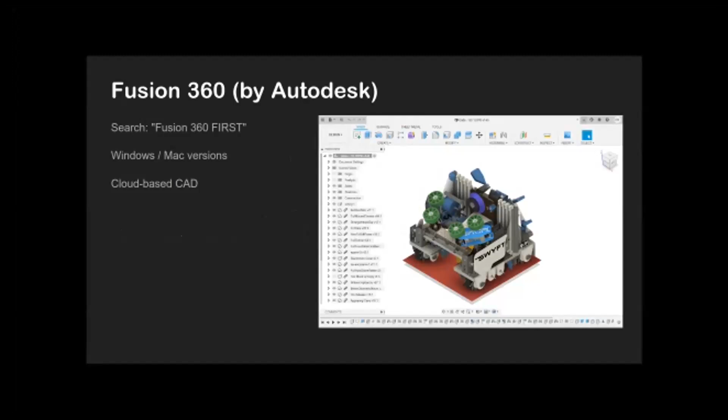So Fusion 360, if you want to know how to get it, here's how I always do it. I do a Google search for Fusion 360 FIRST, and let's see if I can pull up my Google page here and do that in Chrome. So if I just say Fusion 360 FIRST, then the page that I usually find, first of all, is Fusion 360 for FIRST robotics competitions, and then I'll follow that particular link.

And it'll go through, and it has enrollment, and there used to be a place here where you could register. If it's not there, it's probably the second link. Oh, FIRST Robotics, Autodesk, that's where I often would go. And it talks about the resources that are available for teams if you're doing FIRST Robotics. So there's free software, and there's the link here that says Get Fusion 360. So that's where I've always started, and I've been able to get Fusion 360 through there pretty quickly.

They talk a lot about educational licenses and about having to be affiliated with an official educational institution, but as long as you list yourself as being a mentor for a team, my experience has been that you're able to get access if you're an adult and you're a mentor. If you list yourself as being a team member, then they're pretty good about being able to get access as well.

The other thing that came up today in an email, I got an email from Rachel Moore. Rachel is another FIRST expert in North Texas. She has done a lot of FRC, but she's also been mentoring FTC. She's an FRC alumni. She's a Woody Flowers winner, if you know what the Woody Flowers Award is. And she said to remind teams or have people consider Onshape. And it's another CAD package, but it runs in a browser.

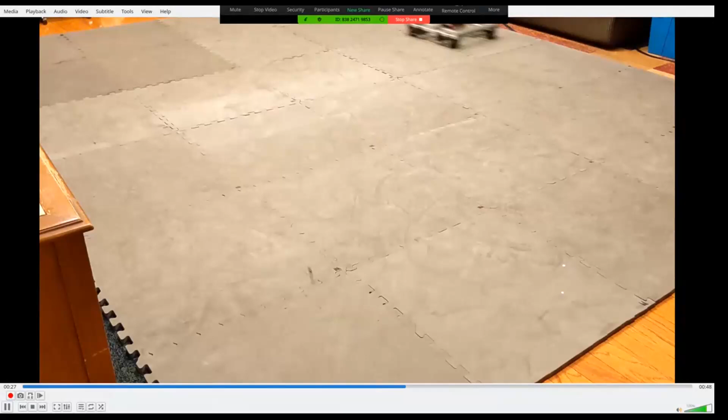It's a mecanum-based robot, which means that in addition to turning and going forwards, it can go sideways, and you can see it going sideways here. And you can see it's a little bit speedy. 7172 likes fast robots. So I showed this one to the team, and they're like, yeah, it's almost fast enough. It'll have to be faster.

My goal for creating this robot was to come up with something that is entirely REV-based. So I wanted to come up with something that was entirely REV Robotics based, or almost entirely REV Robotics based, that was a mecanum drive that had some important features that I like to see in robot designs.

At the FlySet workshop in a couple of weeks, I'm going to focus on the design aspects of that robot, the principles that I was using to create that robot. Tonight, I'm going to show just the mechanics of how you might use Fusion 360 to put it together. So that's what we're going to be working on tonight.

So with that, first of all, does anybody have any questions? Anybody have any comments before I go on? As I go through tonight, I'm going to stop frequently to invite comments and questions.

Patrick, it's about the educational license. It seems Fusion 360 now requires the students to submit some evidence document to show that you are part of the school. That's possible. What other organizations have accepted in the past is a student ID, and or a report card would do it, right?

So if you have a report card, you could blank out the grades and some of the personal information, but most organizations that I've worked with, such as the Texas Workforce Commission, have been just fine if you did a student ID or something like that. And certainly a letter from a teacher would almost certainly work.

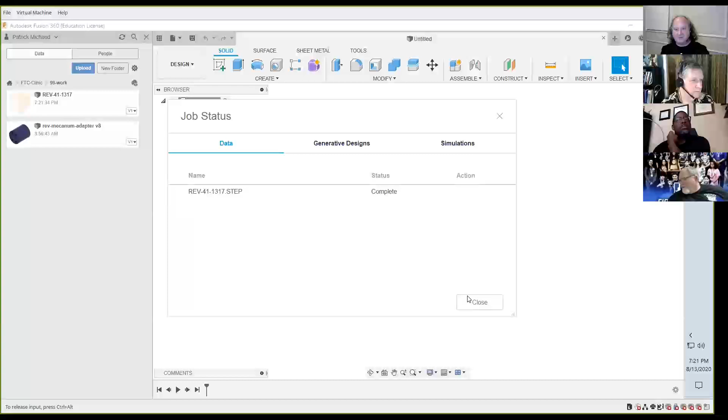You can see over here on the left is the file I just uploaded, Rev 41 1317. If I open that file, it opens up, and we can see here's the part. It's a bearing block, a bearing pillow block.

Usually what I do at this point is rename the part so I can find it more easily, because I don't have the Rev part numbers memorized. And if anybody does... anyway, I'm not going to say anything. So I'll call it bearing pillow block, but I leave the part number there so it's easy for me to find. So there I got a bearing pillow block.

To go along with the bearing pillow block, you also generally need a bearing. So I'll scroll down a little further, and there's the bearing I would need. I'll go to that page and download it. So I downloaded that step file, and now I'll go back to Fusion 360 and upload that bearing. That's the step file there, and go through the same process.

You can upload multiple files at the same time, you don't have to do it one at a time like I'm doing here. And while it's working, you don't have to wait for it to finish, you can go do other things while it's working. So while that's happening, I'm going to go get one or two more parts I need for this demo.

I also need a hex shaft, so I'll download it. And I also need a wheel, so let's go back to motion. Oops, rotary motion would have been fine. Rotary motion, and I'm going to grab a wheel. Let's get a 60mm Omni wheel and download it.

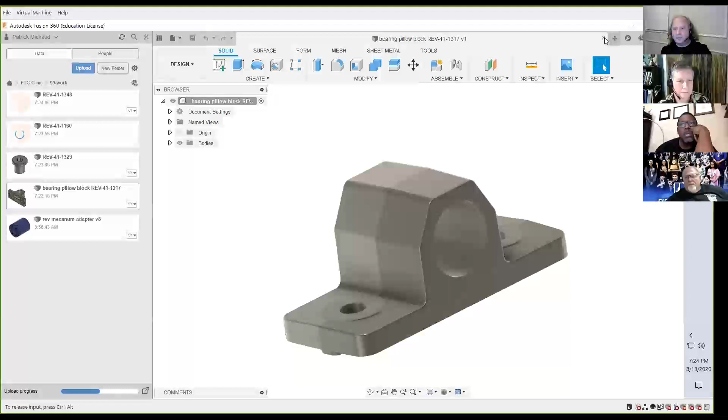So that's how you download and get parts in for your model. Now there's a way to organize them, and I'll show you the organization system my team has been using for a bit, but right now it's easier if I just show all the parts over here. I'm going to close this window with the bearing pillow block, and start like I'm creating a new robot.

So here I'm in Untitled, this is a new robot. If you want to build a new robot, you actually need to save what you're working on before you can load any parts in it. You have to give it a name, so I'm going to save, and this is going to be Example Robot 1. You can see it created Example Robot 1.

Now once that's been created, we can bring parts into this model and start putting them together. So I'm going to start by bringing in the bearing pillow block and putting it into this model, and there it is.

When you first drop it in, you can turn it, replace it, or move it to different places. So I'm going to turn it upright, at least the way I think of it as being upright. You can see these little handles here. If you grab an arrow, you can move things up and down. If you grab one of these little dots, you can turn it in different ways, turning it around on all the different axes. So you have a lot of different ways to put it together. And when you have it where you want, you just say okay.

That has brought this bearing pillow block into my model as the first piece I'm going to start with. So we've seen how to bring parts into Fusion 360, and we've seen how to put them into our project.

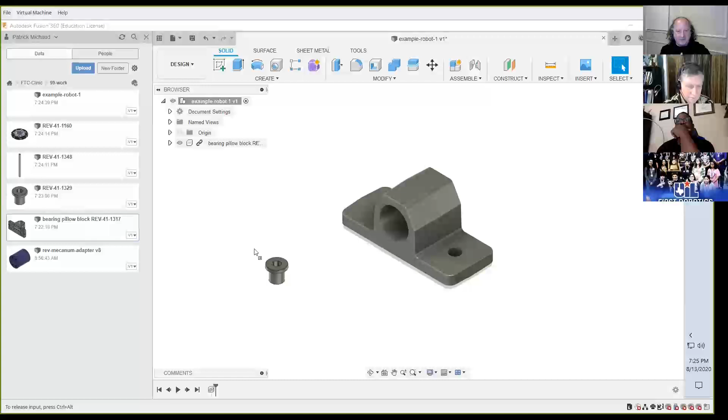Now I'm going to add a bearing to this. So I'm just going to grab the bearing and pull it into my model, and you'll see that it puts the bearing in. It likes to always put things in at the origin where things start, and they tend to overlap, so I'll usually just grab it and pull it off to the side.

The most important operation to know about and be familiar with when you're trying to assemble a robot in Fusion 360 is the joint operation. That's how you join two things together.

I'm going to go to the joint menu, which is under assemble. There are keyboard shortcuts for so many things, but I'm going to try not to use the keyboard today so you can follow what I'm doing and not just wonder how that happened. So I'm going to start by creating a joint.

A joint is a connection between two parts of your model, between two components. If I click this and say joint, it opens a little dialog window on the right, asking what two things I want to join. What is going to be component one and what is going to be component two? You always take the thing you just added, or the thing you want to join first, and then pick what you want to join it to.

So I want to join this bearing and leave this pillow block where it was. I'm going to scroll around here. There are a lot of different controls for moving your model around, and I'm not going to go through all of them since there are tutorials for that. But I'll just scroll around to the bottom here and say I want to join.

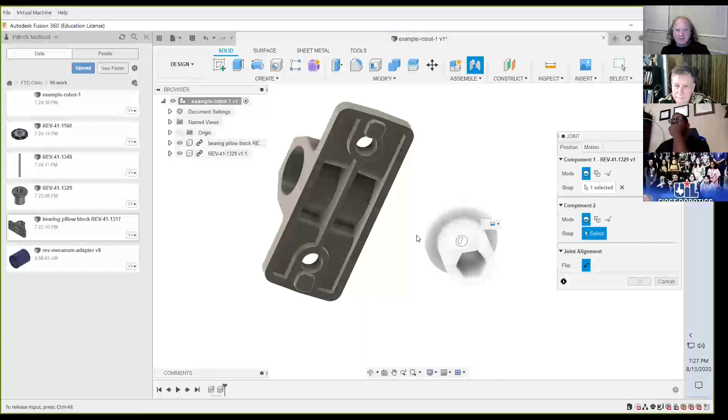Once I've clicked on it, it grays out because you can't join it to itself. Now it's wondering what you want to join it to. I want that ring I just selected to match up with this hole in the pillow block. So I'm going to select that, and once I click those together, it puts them together.

Now, unfortunately, it put them together backwards. So there's an option here in the dialog box called flip. It thought it needed to be flipped, but I can just flip that and make it go the other way. Now the bearing is joined with the pillow block as a single unit.

So if I just hit OK, now I can move it around, and if I grab the bearing, you'll see that it moves together because they're joined together. That's the very common operation we'll be working with throughout this.

You can also see, just very faintly, there's a little marker right in the middle. That's the marker that represents a rigid joint, and it's saying this is where these two things are joined together. So I can go and edit that, and there are lots of ways to edit the joints.

I can look at that. If we look at the timeline, we can see that we've done 3 steps so far. One step is that we inserted a component, a bearing pillow block, and then we inserted this part, REV-41-1329, and then we joined them together in a rigid joint.

I can go back and edit that joint, and I can say I want to change the motion, I want to change the type of joint that's there. There's lots of choices: it can be rigid, it can be a revolute, it can be a slider, it can be cylindrical, it can be a pin slot mechanism, it can be a planar joint, or it can be completely free in a ball joint.

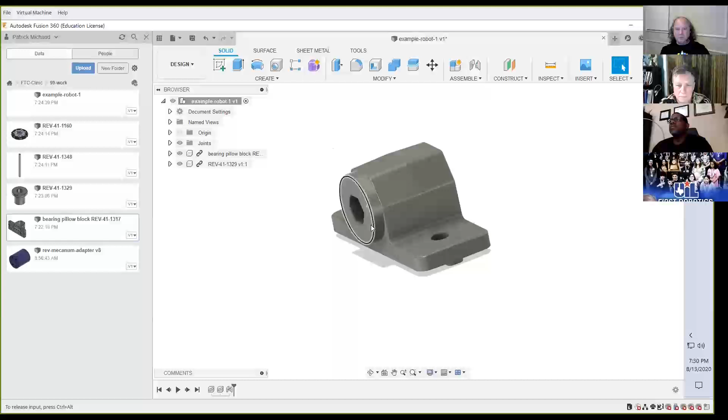So now we can model that. We can move it by hand. So if I try and grab it, what happens is the pillow block tends to want to come with it. I'm going to ground the pillow block. I'll talk about that a little bit more later.

But I'm going to ground the pillow block, which means I don't want the pillow block to move anymore. The pillow block, if I grab it, I can't move it anymore. It's fixed, it's grounded in the system. But with the bearing, because it has a revolute joint, I can still make it turn by hand, just with my mouse, to be able to see what the impact is.

Whenever you move something around, there's a little thing that notes that the position has changed, and you have an option whenever you change the position. So I could just be playing around with this. One option is I want to capture that and take that new position, or I want to revert back to where it was before I started fiddling with it. So I'm going to revert, and you'll see the bearing will pop back to its original orientation.

So I'm going to stop there and open up to see if anybody has any questions.

Am I going too fast? Good enough? Too slow? You can put it in the chat if you have a question, and I'll try and see about that.

Okay, Scott says going great so far. I'm going to continue on.

All right, so now the next thing I'm going to do is put a shaft into this pillow block. So I can go over, I downloaded the shaft already, I'll pull it across. You can see there's the shaft, and I'm going to kind of move it out of the way.

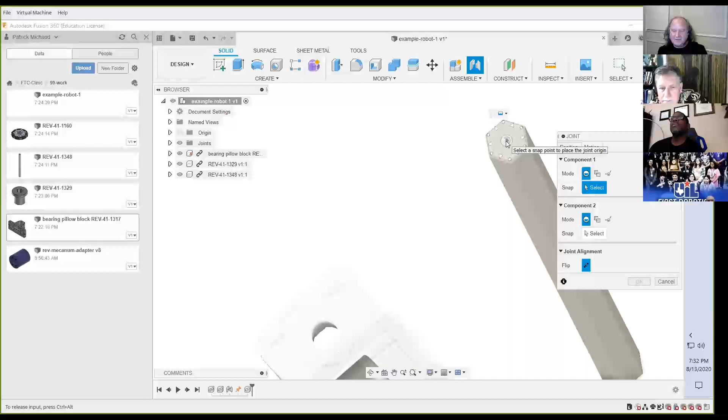So I'm going to grab the end of this shaft. As I scroll in, as I get on that face, you see all those little dots there—those are all the snap points, the places that can be joined to. I could join that little tiny corner there, or the center of that face, or the center of that edge. I can join that edge, I can join this face. You can pick where you want to join.

I'm going to join right on the end of that face, and I want to attach it to this pillow block, that center point on that face.

Now this one becomes tricky. So the lesson to learn here is the control key is your friend. I meant to get a keyboard display so you could see what keys I was pressing when I use special control keys, but I didn't have time to get that. So I'm highlighting this face right now, and I really want to join the center of that shaft to that center point.

But as soon as I move off the face, it says, oh, you're wanting to go somewhere else. And I don't want to join to the center of that face. I want to join to the center of this round face on the end. So once it's highlighted, if I hold down the control key, so right now I'm holding down the control key on my keyboard, no matter where I go with the mouse, it keeps that face highlighted. And now I can get and select the point that I want to join to.

So now I can say join with that. And so it joins the shaft there, and it's a rigid joint. And we can see that it's made that connection there between the shaft and the bearing block. Now, I really want the shaft to go through the bearing block, so I'm going to flip it around. And we can see that when it joined, they're out of phase with each other. They're not exactly fitting together snugly because they're about 30 degrees rotated. With round shafts, you don't have to worry about that, but with hex shafts, you kind of do.

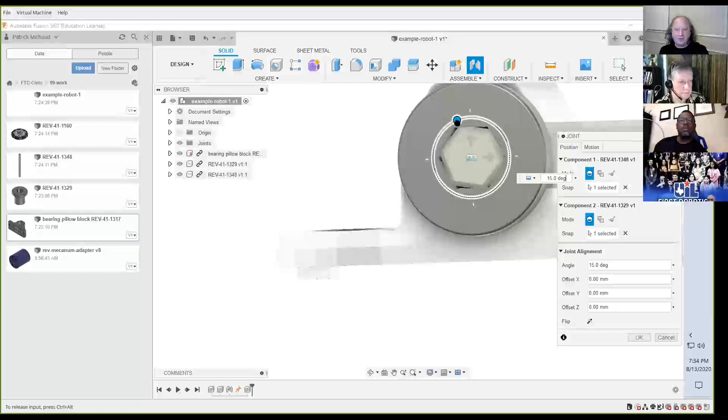So once again, like we did when we first placed a component, you can turn it. And I'm just going to turn it 30 degrees so that it will fit correctly within that bearing. The other thing is that I probably want it to extend away from the bearing, so I'm just going to pull it through. If we scroll out, you can see what I'm doing is I'm moving the shaft through the bearing just as if I was assembling it by hand. And I'm just going to put it in the middle there. And then I'll hit OK.

And now the shaft and the bearing are joined together. And in fact, if we watch really carefully, when I move the bearing, you'll see that the shaft will turn with it. If I can select it, there we go. When I move the bearing, the shaft is now turning with it because they're fixed together. So they're both turning around that revolute joint that the bearing had.

All right, let's add one more component just to show more of how this works. Let's add a wheel onto the shaft. And let's move that out of the way. So I'll say, okay. This wheel's a little tricky. So Rev has been really nice that the Omni wheel that we have here comes in and they actually have modeled all the different parts. But the step files don't always know the joints that are there.

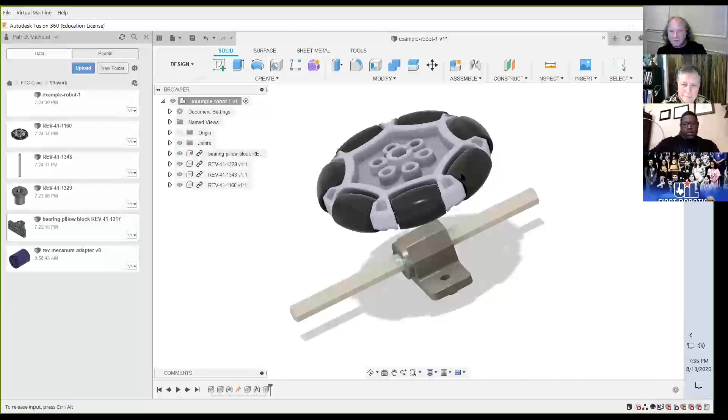So if I try and grab this, what I think will happen is you'll see, oh no, it's all together. Okay, good. I don't have to worry about it on this one. Sometimes when you bring in a model, if you grab one of these wheels, it comes away from the rest of the model because they're not joined together, but it seems to know about these joints, so that's good. So I'm gonna put this wheel onto the shaft. It's the same thing as before. So I'm gonna do a joint. It says some things have been moved, so I'm gonna say just continue, let it be back where it started.

Once again, I'm gonna select this face to get to that little center point, and I'm holding down the control key. And then I'm going to connect it to the bearing just like I had before. And rather than try and catch that center point that's there, I'm going to connect it to the outer ring. And so I'll select that. And oops, oh, it wants to know where to connect it to. I want to connect it to that little spot there.

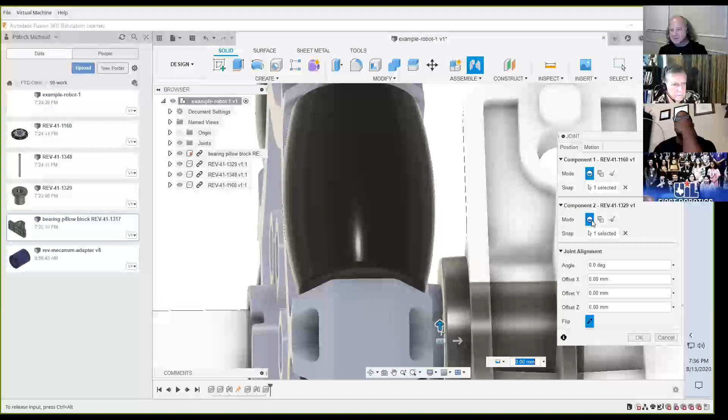And if we scroll around here, we can see that the hub of the wheel is directly against the face of the bearing because I picked that outer circle to do it. Let's try a couple of different spots just to see different things that would happen. So I'm gonna cancel where I wanted to connect it to. And now it's asking me, so I'm gonna choose this circle instead.

So if I connect it to that circle and we go around and see, you'll see that it connected the wheel to the back of the flange of the bearing. And so the hub is now actually inside the bearing. That's physically not possible, but the model doesn't care.

All I'm showing is that it depends on which circle you click as to what face it will actually connect to. I'm gonna go back and fix this. Again, so I'm selecting the outer face and then I go to that outer ring and I'm saying, make those two connect together and line up on that center point. And it does it for me. So now they're connected and we're good to go.

And since all of those components are rigid with each other, when I move the wheel, you can see that it turns with the shaft and the bearing inside of that pillow block. Any questions on there?

I see a question about somebody that's trying to drag the parts into the plan. So if you start a new project or a new component and you don't have it saved and you try and drag something in there, it won't let you do it, right? It'll give you this error: Please save this design before inserting components. So that may be the problem that's being seen there.

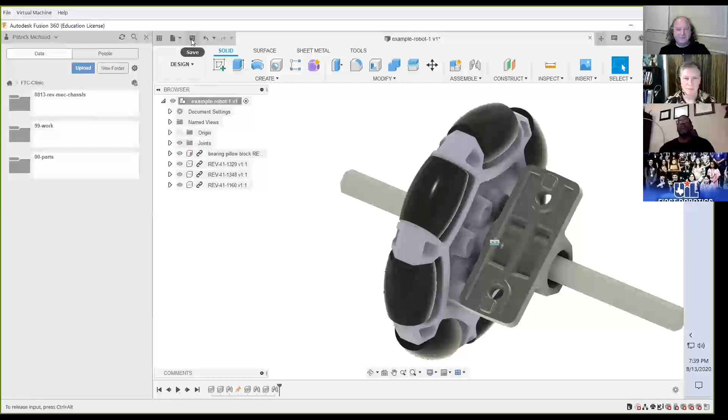All right. So let's go back up to the top level and I'm going to create a new folder and I'm going to call this 0813 Rev Mec Chassis. I'm going to space it out because that looked really weird. Mec Chassis. And now we're going to see about actually creating a drivetrain, something a little bit more substantial than this. Oh, by the way, don't forget to save. Save often in Fusion 360 because it does keep a history. So if you make some changes and you decide you don't like them, it's easy to revert back to an earlier version. So I just created a folder.

I'm gonna go into that folder and I'm going to start a whole new design. I think I'll leave that open just in case we need it. I'm going to start a whole new design, and this is going to be called our drivetrain. Right, so I've just started an empty project here, and this is where most robots would begin.

Actually, I'll go back to the example. You can see on the bottom, the timeline. These are all the steps that we did. So we inserted a component. We inserted another component. We joined them together with a revolute joint. Then we grounded the pillow block so that it couldn't move. Then we added another component, the axle, the shaft, and we joined it. And then we added the wheel and we joined it. That's the timeline of steps that are done.

You can walk through the timeline, so I can back up in the timeline to see the impact that each step had on the model. And you can also get rid of individual steps out of the timeline or insert things in the middle of the timeline if you need to.

On the left up here is the browser. And the browser shows you all the components and things that are part of your model. So here are the components that we added: the bearing pillow block, the bearing, the shaft, and the omni wheel are all there. And also here are the joints that we created. We created a revolute joint, a rigid joint, another rigid joint. And so if you just click on the little arrows, it'll expand out to show you everything that's in each of these different components so that you can do things.

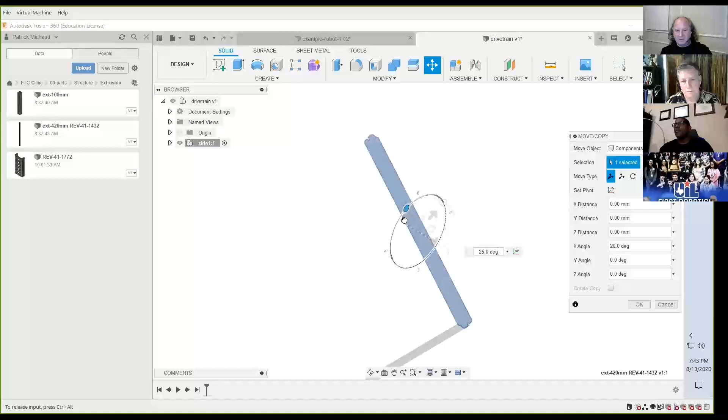So if I go in the parts window, we've decided to pretty much copy the Rev hierarchy for how things go. Most of the other robotics companies tend to use a very similar hierarchy. So we have a folder where we keep all the bearings and shafts, and we have another folder for electrical parts, another one for hubs and sprockets. So extrusion will be structure. So I'm going to go in and grab a piece of extrusion, and I want this 420 millimeter extrusion. So I'm just going to pull it into my model. And when I do that, I'm going to rotate it so it's running that way.

And so this is going to be the left side of my robot. You can see that I have it going this way. The orientation that we have is up in this upper right-hand corner. You can see that the top is pointing upward right now. Front is facing towards the bottom left of the screen, and the right side of the model, which is the left side of the robot, is facing towards the bottom right of the screen. So I've just pulled it in there, flipped this around that way, and I'll say okay.

And now I have this nice long piece of extrusion that is going to be on that side of the robot. And I'm going to go ahead and ground it as well. So I'm going to expand this out. We can see here's the extrusion that we just put in. I'm going to right click on it and I'm going to say ground and fix that in place because every other part of my robot's going to be relative to this one.

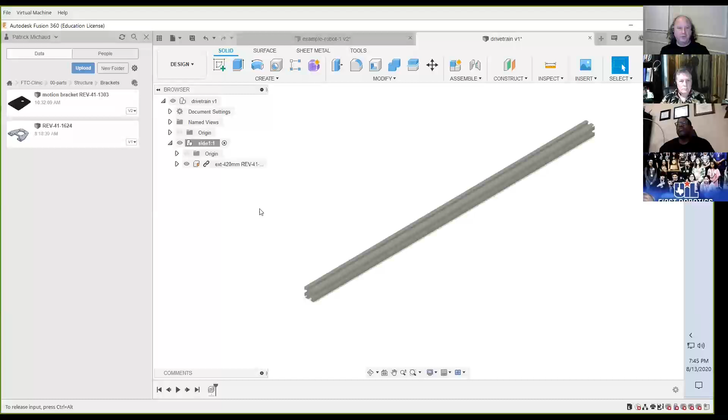When designing this robot, I wanted to try and stick with parts that were in the starter kit so that more people would be able to build the robot and not have to buy a bunch of special parts. So the indexable motion bracket is one of those parts. And the most important feature for my purposes is that it gets the shaft as far away from the extrusion as you can get, because I need room for the wheels. So it allows you to get the center of the shaft about 32 millimeters from the center of the extrusion, which makes it big enough to get a mecanum wheel below the top of the shaft.

Guido has a question if you can shorten the extrusion. Yes, you can. And I have a special way of doing that. I don't know if I'll get to it today, but I will show an example of that either today or in the next episode. But yes, you can shorten the extrusion. Let me do the quick example. Let's just go back into the example robot and I'll pull it in there. I create a special extrusion that defaults to 100 millimeters. So I'll pull it in and pull it here to the side.

And I'll show how this was created probably before the end of tonight, I think. So that's a 100 millimeter extrusion. You can see it was pulled in there. Right now it's linked back to the original file. There's a way that you can break the link. And when I break the link, what happens is this model that we're working on right now gets its own copy of that component, as opposed to being simply a reference to this other one. And by having my own copy of that component, now I can modify it pretty easily.

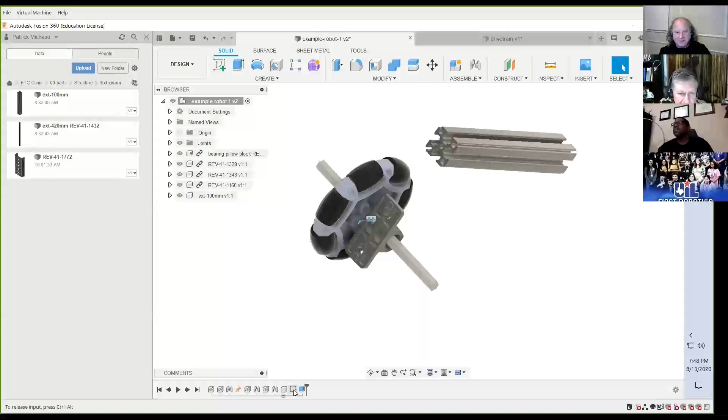And if I press this little plus sign, these are the 3 steps that were used to make this part. So one step was create a new component. The next step was a sketch, which is the shape of the end of the extrusion. And the third one is an extrude step that says how far to pull it. And so I can edit that and I can change the extrusion length from 100 to be some other length. Like let's say we need 225. So I just switched it to be 225 millimeters and that made it longer. Or I can even drag it out to make it as long or as short as I want.

So that's the way that on 7172 we've been making our extrusions. We just have a standard one that we can pull into the model, we break the link, and then we can extend or shorten it to be whatever length we want when we're putting it into the model. So that's the short version of it. But I'm going to stick with the 420 because that's what comes in the starter kit. I do need to go load in the indexable motion bracket. Let me just rename this. Indexable motion bracket. So it's easy to do. I'm going to pull it into my model so I get a copy of the model.

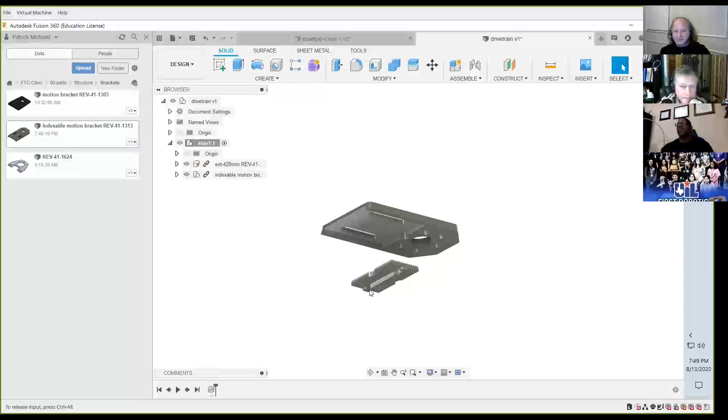Now, the way that the indexable motion bracket works is it's actually 2 pieces, right? So this one piece here is on the back, and I'll pull it away for a second. And it's the part that really attaches to the extrusion to be held in place. And you can see it's got this little bump ridge in it in the middle, and that's to go inside of the slot of the extrusion. And on the other side of that little tiny bracket, it's got this little grid here, this rack that's there, and you put it somewhere on the other bracket, and those pieces lock in place with each other to keep it from moving up and down.

The indexable motion bracket, it's not necessarily a super reliable part if you're not careful about it. So I don't know that very many people end up using it, but the starter kits always have them. And so it was an easy place to start to be able to do things. And the key thing that I needed is that it allows me to get the center of the shaft as far away from the extrusion as I possibly can. It's the bracket that REV has in their starter kit that gets you the farthest away so you can maybe fit a wheel underneath. So the first thing I want to do is I'm going to join this piece to this one to make them a unit at its maximum extension, so I don't have to keep doing that.

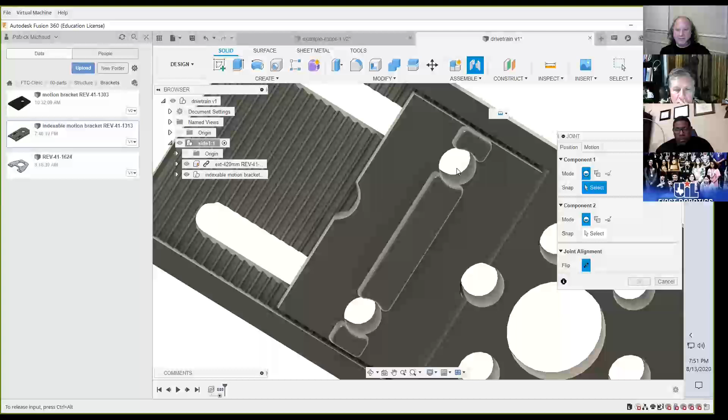So in order to join them, I need to break this link. I need to break that link so that I have my own copy of it in this model. And I'm going to do the join, and I'm going to say joint, and I want to join this circle right there, and I'm holding down the control key again to be able to get to that part. So I'm going to join that circle with this circle here, right?

And it's going to look a little weird at first. You're going to say, oh, you put it on the wrong side. Yes, I did put it on the wrong side. I did it on purpose, right? But you can see it took that circle that I had highlighted and joined it to that other circle.

Now, that way I know it's at its maximum extension to the top, right? And so now I can say, I want to move it this way, and I'm going to move it so that it's exactly snapped into place on the model. I could try and figure out exactly where that is. I could guess that it's probably 3. There's a really quick way to do it.

So I'm going to move it way over here. I have this arrow highlighted. So if I pick a face that is normal to that arrow, then it will line it up with that face. So I'm going to snap on this face of this other bracket, and you'll see it snaps it exactly in place so that they are aligned up perfectly. And so now when I hit OK, those two components are joined together and they'll move as a unit. And that's pretty nice because I'll be able to reuse this later on.

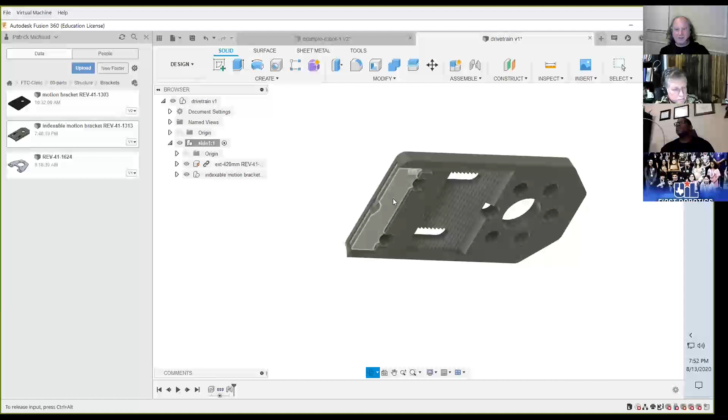Any questions about that so far? This is a good place to break for questions before I do the next step, plus I can get a drink of water. Or any comments? Is anybody having fun?

How did I snap it? Okay, so let me undo. I'll undo the joint. So in order to snap this together, what I did is I went and said joint, and I went on the little tiny bracket that's in there. I highlighted this face. I could also highlight this little edge here. I'm trying to get the center of that hole, right? It looks like I could almost do the center of that hole that way too.

But when I highlight something that puts a snap point on the thing I really want, then I hold down the control key, and now I can move my mouse around. Oops, cancel that. Now I can move my mouse around to get that exact point. When I've got the mouse highlighting that exact point, I click on it, and that says that's my join point. That's my first join point, which is the center of that circle. And now my second one is going to be up on the bracket, and there's a little plus sign right in there, and I want to choose it and make those two snap together.

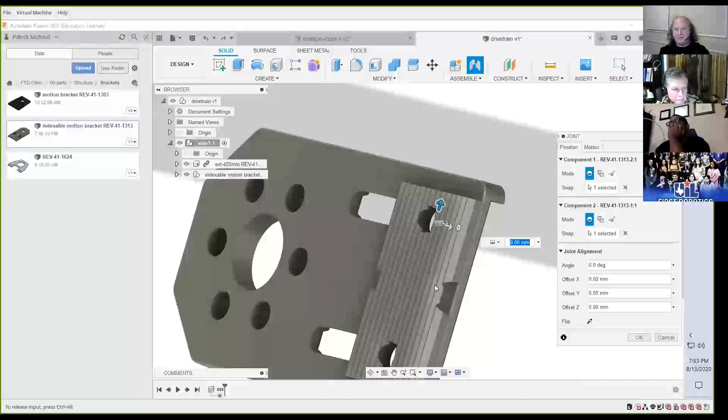And now, because it's on the wrong side, I want to use this arrow to move it back and forth. And when that arrow is highlighted, meaning that's what I'm currently doing, I can click on this face and say, line it up with that. And so it lines up with that, and now we're good to go. All right. So that's now together as a unit. I'm going to revert back to where it was. Now we need to attach this to the extrusion.

If you are doing Actobotics, it's really easy to attach holes to holes. If you were doing Tetrix, it's really easy to attach holes to holes. If you're doing GoBilda, it's really easy to attach holes to holes. If you're doing REV, it's really hard to attach a hole to a slot. There's not really anything to grab onto. So after a day or two of experimentation, this is the way I came up with. There are many ways to do it.

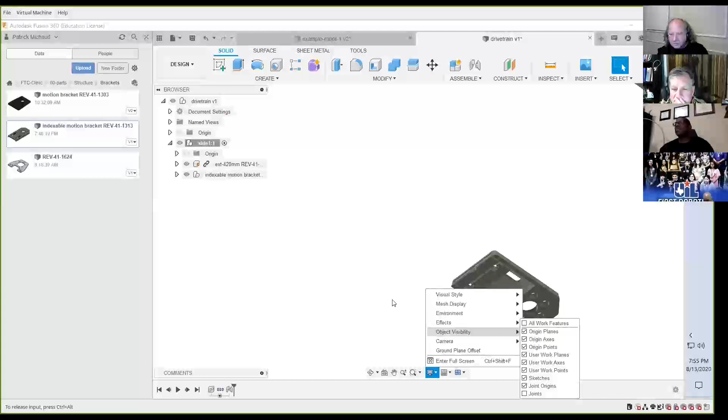And I'm going to go turn off my joints here real quick. So I'm going to go to object visibility. See that little joint symbol there? As you get more joints, they start cluttering things up and getting in the way. So I'm just going to say, don't show me the joints for now. I know they're there. All right, so the way that I found to do it is, let's get this closer together so that we can see what's going to happen here.

What I'm really wanting to do is to be able to attach this bracket into this slot that's right here. But there's not really anything that I can attach to easily without doing some weird calculations and the like. And I don't want to attach the middle of this face to the back of the slot, because that's actually too deep inside of the extrusion. In reality, what I know will happen when these are attached in the real world is that this face will be flush with this side of the extrusion.

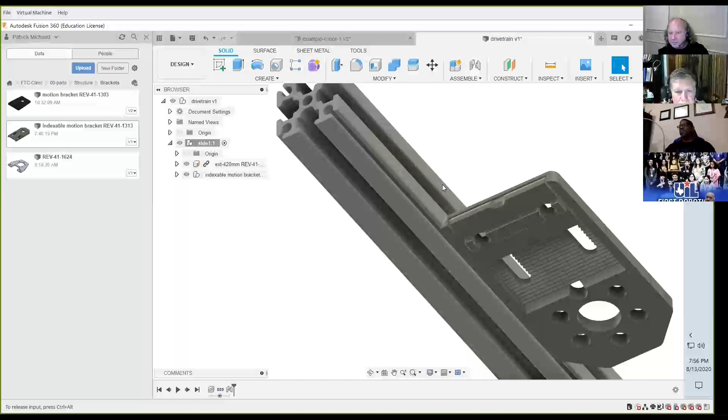So that's really what I'm wanting to attach somehow. But I don't have the proper things to be able to do it quickly. If anybody finds a faster or better way to do this, let me know someday. But what I'm going to do is another join, much like we did before. And I'm going to say continue. It's going to move that piece way far away because I didn't want to capture the position. And I'm going to grab this hole, just like I did before. I want to attach that hole right there.

I'm going to go up to the bracket, to the extrusion, and attach it to the back of this face. This is the inside face of the extrusion. There's a snap point way down in the center of the extrusion, but I'm going to grab the middle of that face, and say attach that point of the bracket there. You can see those two are now attached.

It's not exactly in the right orientation, so let's turn it around a bit here. I'm just going to turn it 90 degrees. So now it's in the correct orientation, but it's attached way at the back of the extrusion.

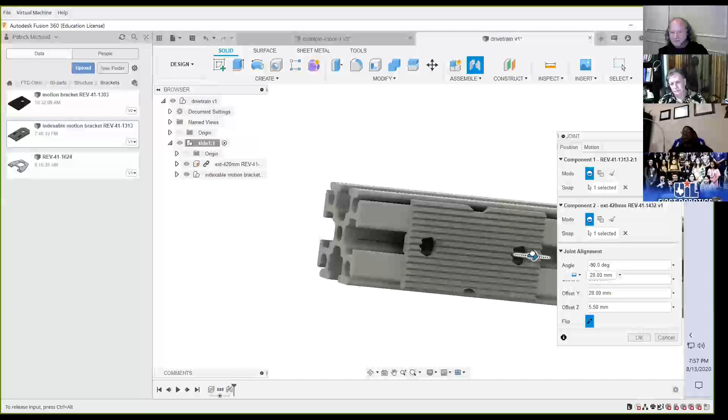I want it to be flush with this outer edge. So I'm going to grab that arrow and say, make it flush with this outer edge, and boom, now it's flush with the outer edge. And I can pull it to the right to make it part of the extrusion. Now that bracket has been attached to this extrusion exactly in the right spot.

You can see if we look really closely inside there that the little tabs on the bracket are nested inside of the slot, which is what you would expect to happen. It's flush against the face of the extrusion and so forth.

Any questions or comments on that?

So Patrick, how do you know it's in there? Is there a way in which you know the distance, the placement that you are on the extrusion? Like how many inches or millimeters?

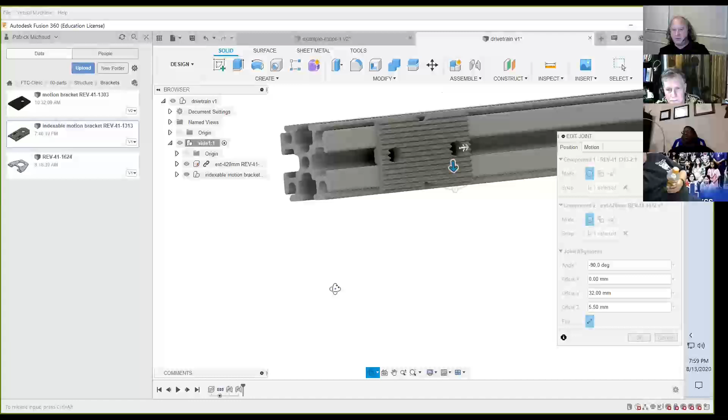Yeah, I did that a little fast, so I'm going to go back and edit that joint. Okay, so here are our arrows, and over here on the right is the distances, offset in X, Y, and Z.

My Z is this one, and it says I'm 5.5 millimeters offset in the Z direction from that point that I had started with when I did the join. I'm not offset anything in the X direction, which is down this way. And in this particular piece's Y direction, if I click that, it says I'm 32 millimeters away from the end of the extrusion.

So if I wanted to be exactly 50 millimeters away, then I can type in 50. Or if I want to go 40, I'm going to go 40. Is that going to be enough? If not, we can move it later. But does that answer your question?

That does, and it's measuring from the center hole, is that correct? It's measuring from the join point, right? My join point, it's the distance from - I'm going to hide the extrusion real quick. So I said to join this hole, the center of that hole, with that point on the extrusion, the middle of that. And so all the distances are from there, between those two points in the X, Y, and Z directions.

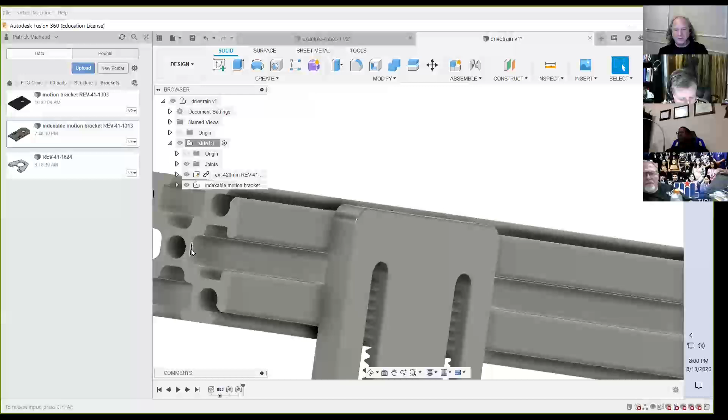Perfect. And just because I like to - a lot of times when the parts come in, they all get treated and colored as if they're aluminum. I'm going to change the appearance of this bracket.

So I'm going to go to appearance. Sorry, that was a little fast, let me close. So under the modify menu, this is where you can modify components in different ways. I'm going to go to appearance, and there's a bunch of built-in appearances in Fusion 360. I'm just going to grab paint because it's quick. I'm going to go to glossy, and say just paint this object black.

So I'm going to grab that little paint ball and drag it onto the motion bracket, and it will turn it black. Now it's going to be easier to distinguish the two parts together.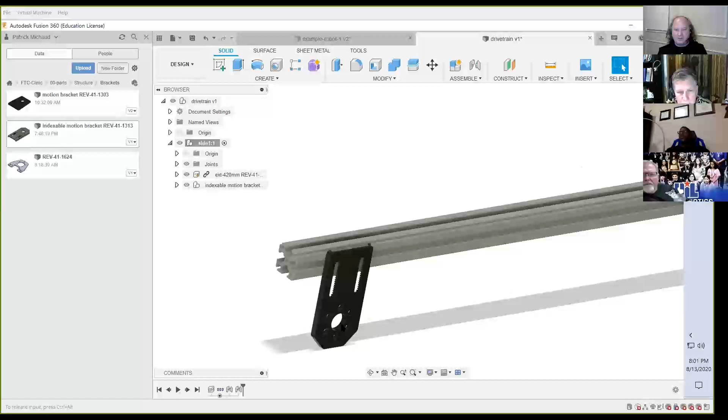Okay, so I've added an indexable motion bracket. For my model, I'm going to need another rail on the other side to hold the other end of the axle. So let's go ahead and put another extrusion over on the other side.

But Patrick, before you go on — yes? Sorry, no problem. You realize that you connected these, but the bracket is pointing down and you wanted it to point up? Is there a way to change the orientation after you've made this joint?

So you can always go back and edit the joint. And you see the little turn thing? I can turn it the other way, like so, and I'll probably need to move it back or something like that, and say okay, and there you go.

Nice, okay thanks. And I just hit undo, for everybody wondering how do you flip it back — I just hit undo. Okay, so next I'm going to want to put another extrusion over on the side.

There are a bunch of different brackets that Rev has available, but I have quickly become a fan of their C channel. So let me go to structure. Let's see if I have their C channel in. I do not have the one I need, so I'm going to go grab it.

I only left the first few parts unloaded just so people could see that work. Later on, the parts we need are all pretty much loaded, so we won't be spending too much time downloading parts.

So these are the C channels. These are new for Rev, they just came out for the upcoming season. They're kind of like extrusion matched with plates, but they're thin and strong because they are C channels with right angles. They're actually reasonably strong for putting pieces together.

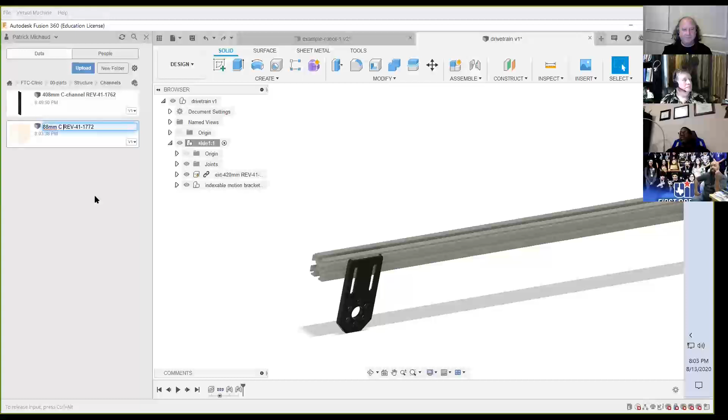The C channel is a really nice, small, lightweight piece that can go onto the robot and help make sure that you keep things square.

Now for 7172, because we didn't have C channels before and because we have the ability to create our own plates, we would create our own endcap plates to do this for us. But now that Rev has these C channel things, we can just do it with those. So that's pretty nice.

So again, it's another join. I'm going to join this part here, grab the edge of the circle, because what I want to do — actually, let me stop sharing real quick and just show what we're getting towards, also just to let people see it here.

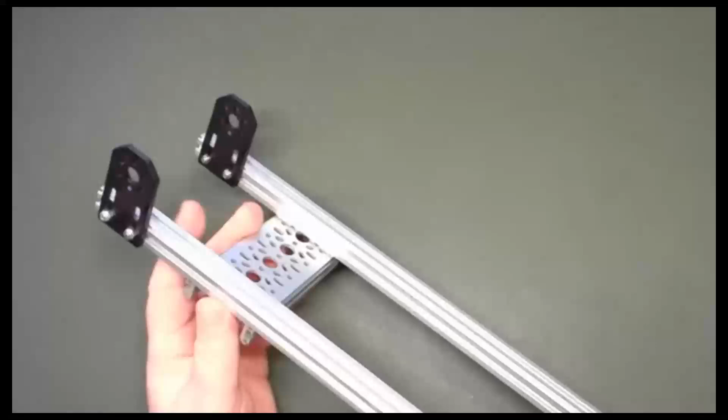All right, so what we're getting to is something like this. We have the two rails, and the channel is on the end, and it's going to hold these two rails at a fixed distance apart so they aren't going to want to move. Then we have the brackets on the end for us to put a shaft through. That's what we're working towards in this CAD model.

Okay, so with that, let me go back to sharing. Okay, so I'm going to attach this piece of channel here.

Just like I've done before, I'm going to go grab the middle of that hole that's right there. Actually, I could just grab this one, I suppose — I'll just grab that one. I like that one better now that I think about it. My other one, I did it there, but I'm going to grab that one.

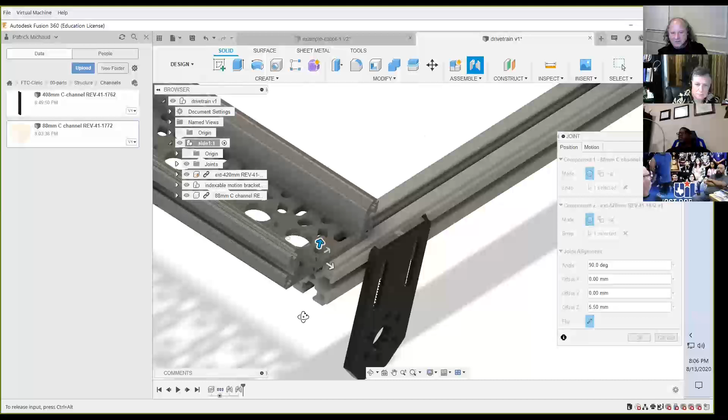And like I did before, I'm going to attach it to the bottom of this back face right in the middle there. It comes over, and we can see that it's attached. I need to turn it 90 degrees so that it's that way. I need to bring it up so that it's flush with the top of the extrusion. Now I can move it back somewhere, and I'm going to go ahead and move it back here.

Right, so now those are attached together. Most importantly, we want to make sure those holes are lined up with that slot, because that's what's going to really happen when we build it for real. We don't want to attach them where the holes aren't in alignment with the slot in our model, because then it won't fit when we try to build it in real life.

So that got me this one there. Depending on how much you want to model, you could put all of the screws into your model, actually placing them where they're going to go. What I do for my models, and what 7172 tends to do, is we only put screws in where clearance is likely to be an issue, and that will happen on this particular model. So if clearance is likely to be an issue, we go ahead and put the screws in just to make sure we get appropriate clearance.

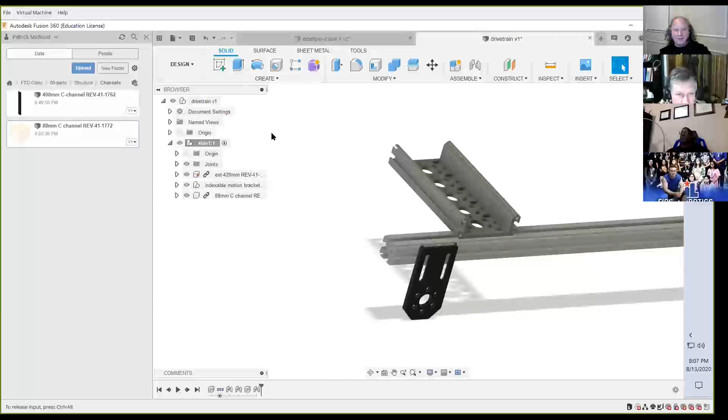Now that I have this one, I'm going to add another extrusion over on the other end of this bracket so it's connected there. I could drag another one in, but a nice feature of Fusion 360 is once you've loaded a part into your model, you can just copy and paste it to get another part. So I right-click on this extrusion, hit copy, then right-click on the background and hit paste, and it pastes another copy of the extrusion in. Just as if I dragged it in, I can pull it over, and now I can do the attachment.

Now I need to attach this rev rail to the holes that are here. This is kind of the opposite step as before. I'm going to do a join, grab the middle of the bottom of this back face, grab that point, and join it to the center circle that is here. That brings them together, but it's up too high.

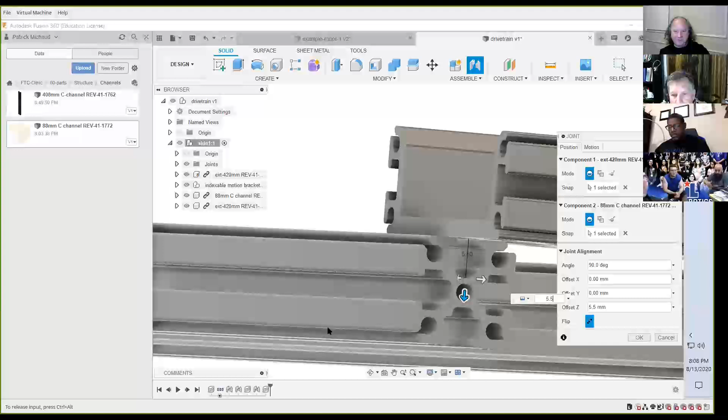So I need to lower it down. There's not anything I can make it even with easily, so I actually have to type in the number here: 5.5 millimeters. I know it's 5.5 millimeters because I've measured it before and done it so many times, but you could always figure it out on the model. Then I want the front of this extrusion to line up with the end of this extrusion, so I change this arrow, which controls how much it goes back and forth. Then I click on the end of this other extrusion and line that up with it. Now they're both aligned up together so I know they're lined up properly.

All right, so that's one way to do the join. There's another one which I'll probably show for another join in a second.

At this point things can start going quicker because my parts that I need are in the model. Now that I have this rail and they're fixed all together in place, I need to copy this bracket over to this side so I have my other bracket. I can just copy this indexable motion bracket, and by copying it, it's already got those two pieces joined together like before, so I don't have to repeat that join from when it first came in. So I copied it, here it is, and now I'll just repeat the joins we've been doing.

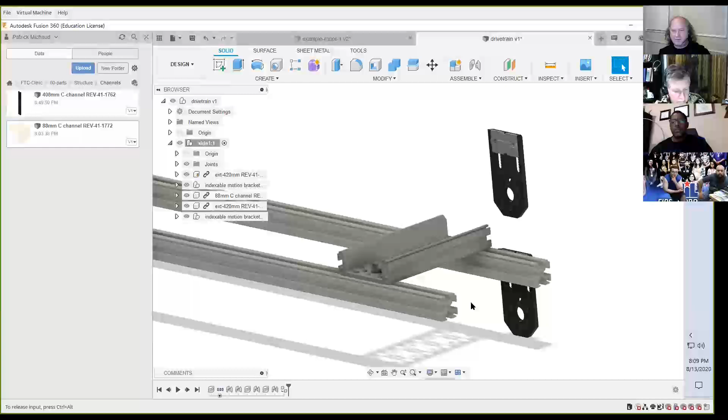But for this join, I'm going to cheat a little bit, or at least I think of it as cheating, but it kind of works. Rather than attach the bracket to the extrusion, I'm going to attach this bracket to this one. So I'll join this bracket, joining this hole right there, the one where the bearing would go in, or the other piece would go in, to this hole right here.

All right, and they'll go right on top of each other, and now I can move it back and forth. By doing it that way, what I'm certain of is that these brackets will line up, and that's important. That is the important thing about these brackets, is you want those holes to be aligned with each other, because there's going to be a shaft and some bearings going through. You don't want them to kink.

So I went ahead and aligned this bracket. Oops, not that one. I aligned that bracket, the center, the borehole, in the middle to this other borehole in this bracket. And now I'll just move it back and forth and say, make that flush with the extrusion. And now it's there flush with the extrusion.

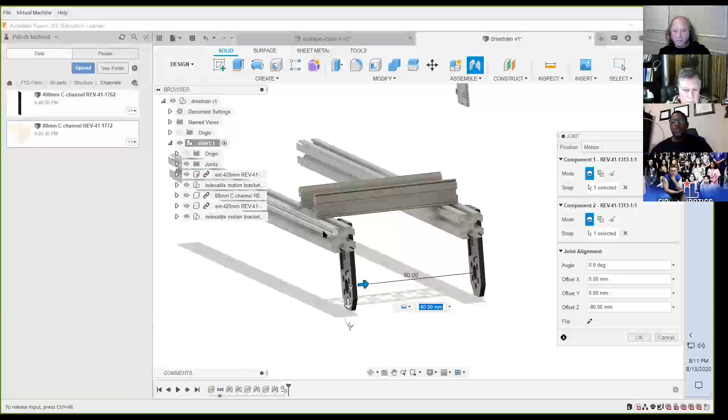Some people are probably wondering and saying, wait, shouldn't it go on the other side of the extrusion? Yes, you could model it that way, but mine is being modeled on the same side because the shafts that I have won't reach if I put it on the other side. So the model I have does it this way. All right, and so now I say okay, and there we go. And so I've now added that other index bracket.

Okay, so next it's time to put the shaft in there. I'm doing a dead axle for this model, and I'm going to stop sharing the CAD window. Actually, I'm going to stop and ask if there's any questions while I get this next part ready. And there's a couple of questions. Yeah, okay, got it. I already answered that question.

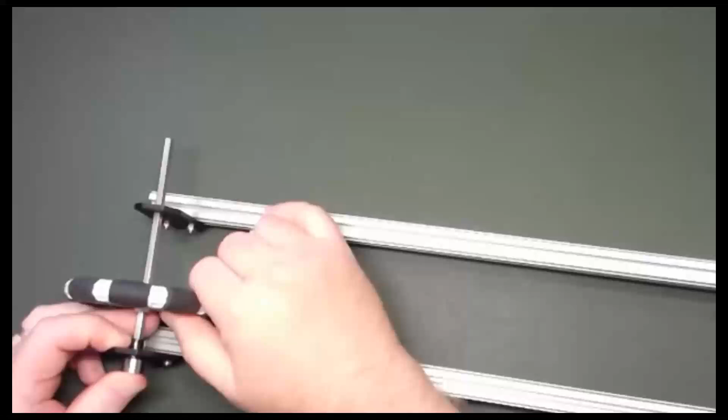All right, so this is the model that we have. It's got a channel holding it together. It's got the indexable motion brackets that are there. And typically, the way that Rev would have you use their various brackets is you take a shaft, you put a collar on the end of the shaft, you put a bearing on that, and you put it through one of these holes, and then you attach a wheel or whatever else you want to attach there. And it goes through the other hole all the way through. And then you have another bearing on this side and a collar on the other side, right?

And that's what we would typically call a live axle. I'm not going to tighten it in place, but this will be good enough to see how it works. It's a live axle because the axle spins with the wheel. As the wheel turns, the axle turns. So if your driving force turns the axle, then that causes the wheel to turn. But we found that we didn't like that very much with some of our robots for this very specific reason.

So I'm going to pull all of this out. These brackets are really wobbly, right? So if I just push on this bracket, you can see how much wobble it has. If I push on the other side, then I can do it. And it's really dramatic when you look at it from the side. So if I push on this bracket, wow, right? And same thing for the other side.

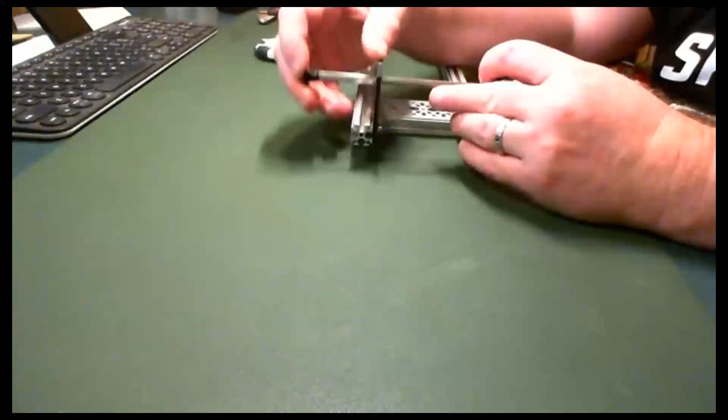So when the shaft is in there, and you put your bearings in place, and you have your collar on the end, everything looks good. But if there's any sort of force, it can wobble a fair distance here, and the brackets can actually come loose from the bearing. This is a problem that many teams have noticed, that their bearings will come out of the brackets because the brackets can bend. So now you have to figure out, what are you going to do to fix that?

You could double up the brackets, but that takes up space. You could try using metal, but the metal brackets don't have the same features that the plastic ones do, and they cost more. For my team, for 7172, we cut our own plastic parts. And the plastic parts that we create with the CNC mill also have this bending characteristic that we don't want. So instead, what we do is we create what's called a dead axle.

And so with a dead axle, which is on the other side of this, that's there. With a dead axle, we actually have hubs on either side of the brackets, and they clamp the axle between them. There's a set screw on these hubs, and you can kind of see the set screw hole here.

You can see the set screw hole, it's kind of pointing upward to make it easy. And so this axle is fixed. It won't spin in place because the hubs are fixed and they're clamped on the axle. But the end result of that in terms of strength is amazingly strong, because you saw how much I could bend these guys when I had that axle in.

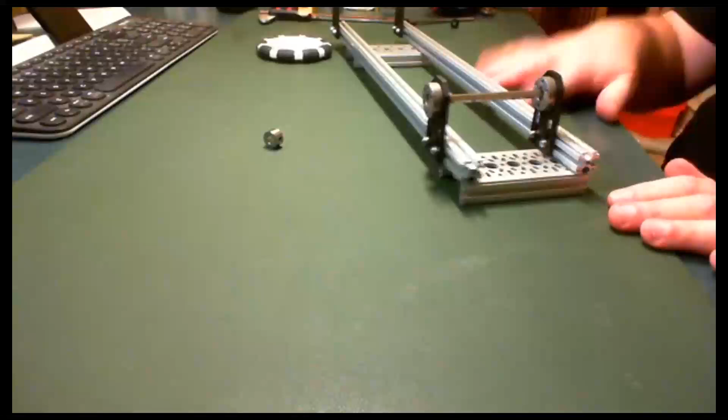So my team has gotten to where we really like the dead axles for doing that. The challenge to the dead axle is it doesn't spin. Right? So now, how do you make the wheels turn? You can't just use a standard Rev wheel as is. Let's go overhead again. It's a little bit easier to see. Can't just use a standard Rev wheel because it's got the hex pattern that's not going to let it turn. And that's okay. We don't want to use Rev wheels anyway. We want to use mecanum wheels.

So with the mecanum wheel, we can kind of do it. There's a hole there, but now we need some way to be able to attach with bearings so that the wheel will spin around the axle. Where's my axle here? So we need some sort of bearing structure that allows this wheel to turn even when the axle does not.

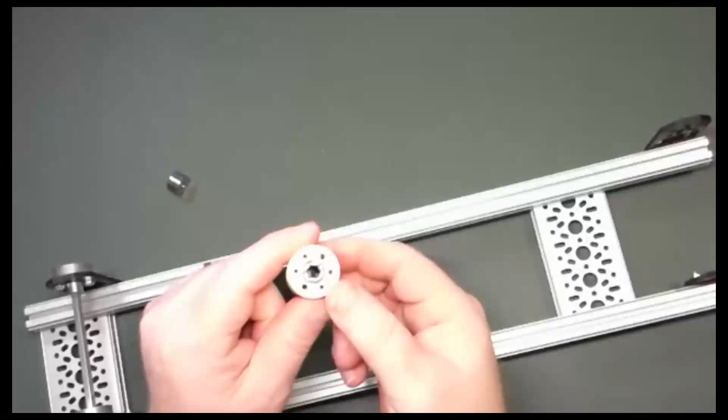I chatted with Rev Tech Support earlier in the spring as I was trying to put this model together. And ultimately what we decided is we needed a 3D printed piece to do it. We needed a custom piece to do it. And so what I came up with is essentially this. And here's one without the bearings in it. Right, so this is a 3D printed piece. It's already 8:15, so I don't know if I'll get to it tonight, but in the next session I'll go through how you model this piece in Fusion 360 and the process for creating this piece.

But the idea is that this acts as a spacer. You need a spacer because when you're putting it onto your mecanum wheel, the chain has to be away from the wheel. So we needed a spacer to get the sprocket, and by a chain turning the sprocket, the wheel is now able to turn even though the axle is not turning. I'm holding the axle fixed and the wheel is turning even though the axle is not. So that's the goal with a dead axle, is that you have a sprocket or your driving force connected directly to the wheel and not relying on the axle to transmit the torque to the wheel. And so this spacer does it.

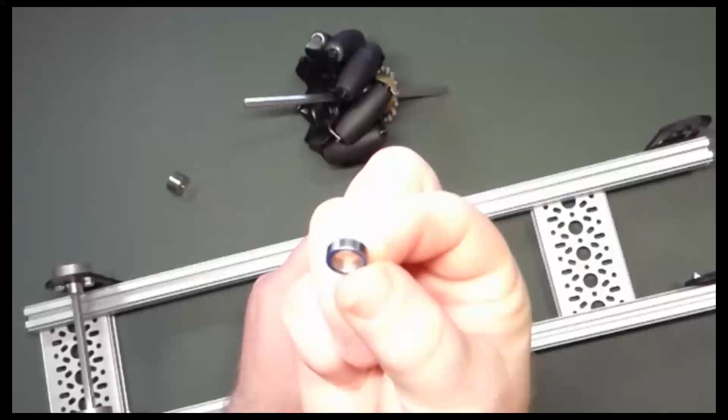So the parts for the spacer that are needed is we have a spacer, and inside of the spacer, I bought a couple of bearings. You can't get these bearings from Rev, so this is the one component of this model that does not come from Rev Robotics besides the 3D printed piece. And it's designed to press fit into a little hole here, which I hope I can get it to fit. My 3D printed piece might not have worked out quite right, but it's designed to press fit into there. And so if you just press it in place, now this little thing has a bearing in it, and there's a place for the bearing to go on the other side as well.

And then Rev also sells these little inserts that go into an 8mm bearing, which is what this is. This little plastic insert gives a hex pattern into the bearing. So if I push this little hex insert in place, now I've created this bearing structure so that when I put it on a shaft like so, this little spacer piece can rotate freely around it. And if you have a bearing on either side, it's going to be well supported. And then you attach the wheel to this spacer with the bearings in it, and the wheel will spin around.

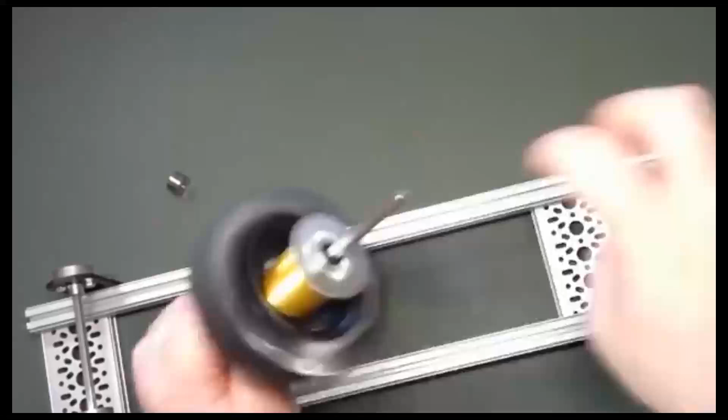And it spins really well. So here's the wheel that I have, and I'll just start it spinning and let it go. And you'll see that it likes to spin for a while. There's not a lot of friction there before it comes to a stop. So that's kind of the goal of where to get to. So the next part of this model is just going to be setting up the dead axle.

Any questions on that before I go on? So Patrick, where'd you buy the bearings? Amazon. It's the only place to buy anything if you're not getting it from a robotics part. So just a minute, I'll show you where I got it from Amazon. Oh, actually, I can just do it this way. It's faster. I don't have to share screen for this.

Come on, Amazon. Oh, wrong one. Amazon. So yeah, Amazon. I'll probably talk a little bit more about it for a bit. But this is an 8mm inner diameter by 12mm outer diameter by 3.5mm bearing. And so you go to Amazon, and you can see there's one here right up front, pack of 10 for $10, delivered to my house by Saturday. So they're in stock, they're easy to get to, and so forth.

As I said, Rev has bearings, and they're really good bearings too. I like the Rev Robotics bearings. The one feature, or misfeature for this purpose, that prevented me from using the Rev Robotics bearings is that they're flanged. So let's see, where's the Rev Robotics flanged bearing? Well, let's just do a search and see where I get to. Next page. There it is.

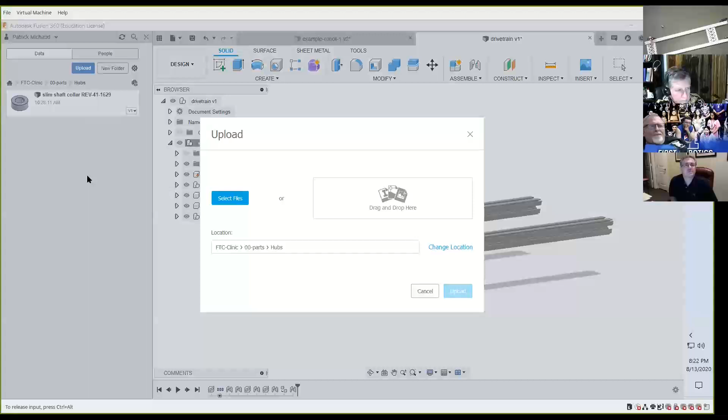So I'm going to download its step file real quick because I don't think I have it in Fusion 360 already. I'll go up to my parts folder and I'll go to hubs. And I will say upload into my hubs folder. I'm going to grab that step file and say upload, and it'll pull it in. And it's busy doing its analysis. And once it's pulled in, I can pull it into my model. And there it is.

All right, so I'm gonna go and attach it. I think I'll just do it the same way I did before. So I'm gonna try and attach that inner circle of this hub to this outer circle of this bracket. So I will say assemble, join. I'll go down to this little piece here. I'll grab that circle. And I'll attach it to that little outer circle, and it pulls it up, which is really nice.

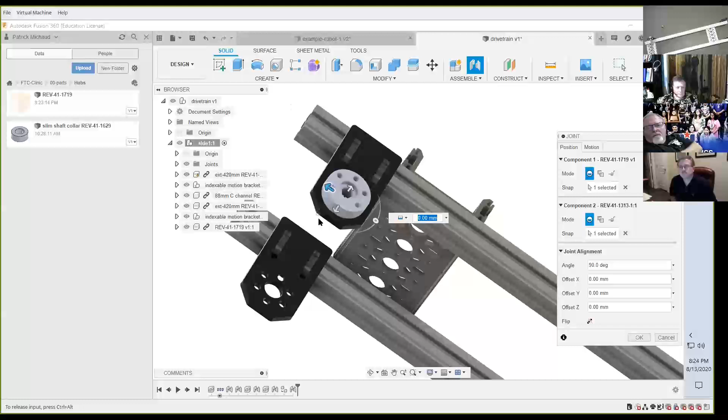This is a good point to remind teams and team members: when you're putting parts together in a model and in the real world, make sure to remember where your screw holes are so that you have access to them later. You don't want that screw hole to be blind or somewhere that you can't get to it. Right now, pointing straight down, you're going to be in pretty good shape, right? There's not going to be a bunch of robot in the way.

But if you take this and you turn it around so that it's pointing upward, this one you might be able to get to okay, but when you do it on the other side, there's going to be a bunch of robot in the way. So it's always good to be thinking ahead about 2 or 3 chess moves to say, where do you want those screw holes to be so that you can access them easily later.

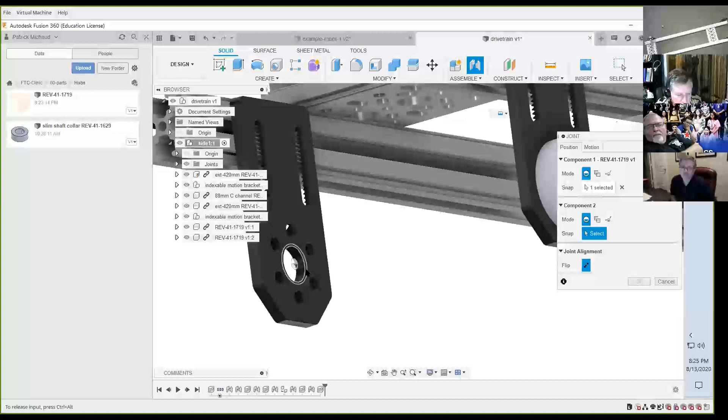Okay, so I just added that hub. I'm going to make a copy, paste. So now it's made a copy, and I'm going to attach it to the other bracket. And what you're going to see is this is just going to start going really quick because it's all just loading parts and making joints. So I'll attach that one, and we're good to go.

And now I need to have an axle or a shaft. So I'm pulling a shaft. And I'll just say, okay. I'm going to grab the end of the shaft. Say do a joint. I'll pull that end there. And I'm going to attach it to this little spot here, like so. I'll flip it around. Looks like it's already in the right orientation. Done. Right? I now have the shaft that's there. Any questions on that?

All right, so the next part would be to model the wheel assembly. Oh, can we modify it to work with the Rev flange bearing? I got a question there from Justine Thomas. Boy, if you can figure out how to make it work with the flange bearing, I would love to see it. I tried for a long time. I did not want to have to tell teams to get the Amazon bearings. But I couldn't come up with a way to do it. Just the screw holes were in the way.

The reason the screw holes are in the way, if we look at one of these, let me stop sharing here real quick. If we look at this, I created this 3D printed part. And there's some odd things about the Rev product line just because they've been evolving over time. I wouldn't say they're new, but they're relatively new. So this is the mecanum wheel that they have, 75 millimeters in diameter.

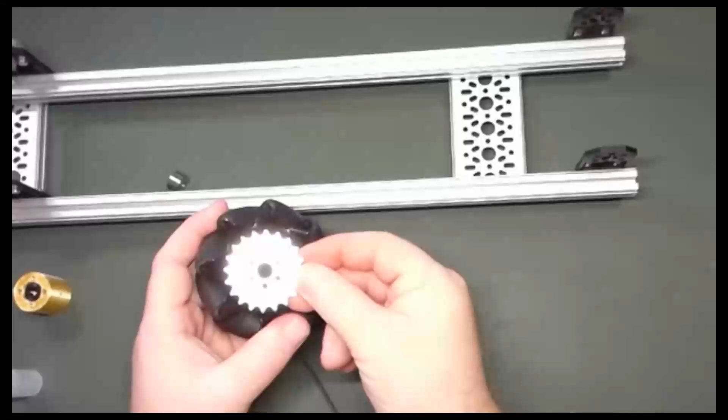Anyway, if you look at a sprocket, the first thing you notice is the sprocket has 6 holes. So these holes don't actually line up. The 4 holes on the Rev mecanum wheel don't match the 6 holes on the sprocket. You can get 2 of them to line up, but that's it. So the 3D printed piece has to be a little bit clever in that on one side, there's going to be 6 holes to attach the sprocket, and on the other side, 4 holes to attach the mecanum wheel.

The other thing is, I have an aversion to 3D printed parts on FTC robots, except in very specific circumstances. If you've ever seen my team drive, you know that they tend to run into a lot of things really fast, and that will break 3D printed parts. And so this 3D printed part, if you're not careful, could be carrying a lot of load.

And it's going to have a twisting load because when it's on the wheel, there's going to be a chain that's turning this sprocket. That sprocket has to transmit the torque through the spacer to the wheel. And if you make the spacer carry all of that load, there's a chance that it'll shear. And so I didn't want that to happen.

And so on the spacer, these two screws go all the way through to the other side of the wheel where there's a nut. They're 35 millimeter screws. They're really long and they go all the way through the sprocket, through the spacer to the other side of the wheel, and then are clamped on with nylock nuts.

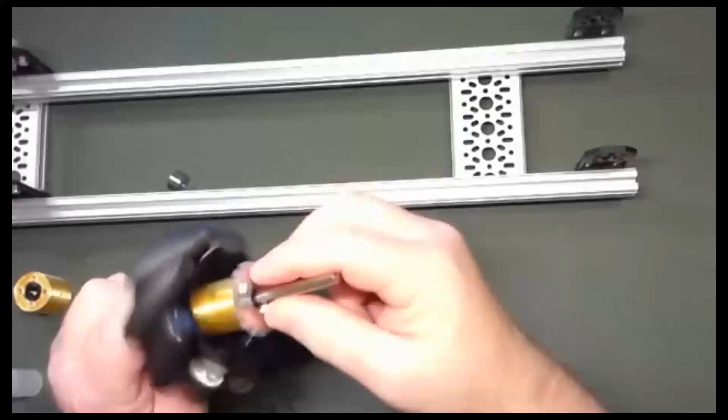And you know, I sent the challenge to Rev Robotics, to their tech support, and said, hey, I want to do your mecanum wheels on a dead axle. How can I do that? And I asked again a couple of weeks later and a little bit later, and then they said, yeah, you're probably going to have to create your own little adapter to make it work. So I said, okay, we'll do that.

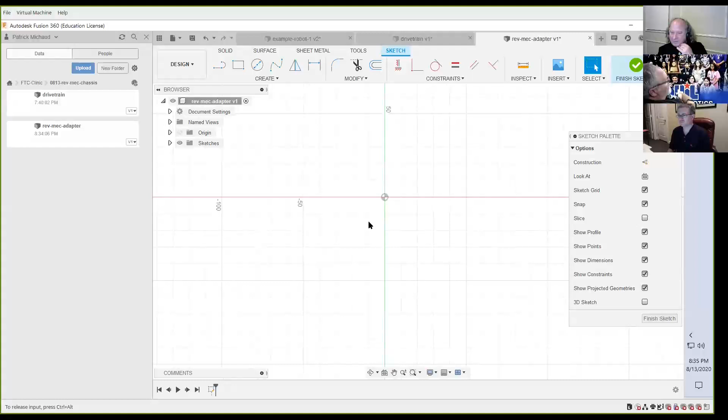If you look at the rotation cube, it says you're looking down at the model from the top. If I hit the home button, it goes back to an isometric view where I can scroll things around. If I say I want to look from the front, it lets me do that, and I'll be looking at the plane on edge. Coming back to home and back to top, I'm looking top down at this.

I'm going to start by creating a circle - this is a center diameter circle. I click on the circle, and it asks me for two points. First, where's the center of the circle? I'll put it at the origin. Now how big do I want the circle to be? I want the circle to be 24 millimeters.

Why 24 millimeters? Well, looking ahead, I know the sprocket I want to use is a 15-tooth sprocket. With a 15-tooth sprocket, it's going to go up against this little spacer. I can't have the spacer be too big or there's no room for the chain teeth, so I've got to keep it smaller than the inner diameter of the chain. 24 works out pretty good for that, and I have to have it big enough to hold all the screws. Just by measuring things out and looking up a few items, which I'll talk about in the fly set workshop, that's how I determined it needed to be 24 millimeters. So I've got that circle there.

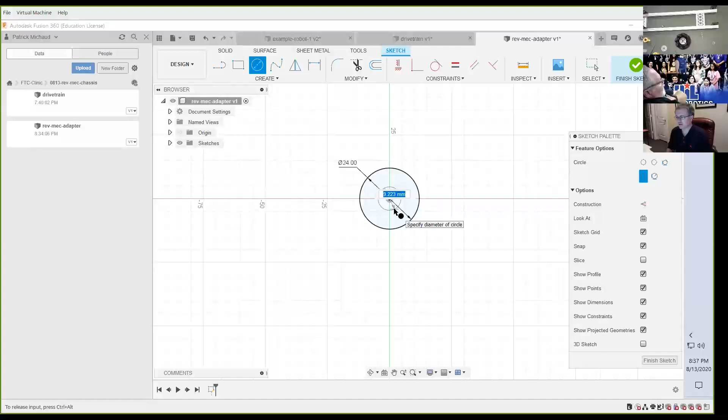I need another circle for the center bore, which is where the shaft is going to run through. I'm going to make that 8.5 millimeters in diameter - I chose 8.5 because I want it big enough for the shaft to go in and turn freely without hitting anything else. I might have to change that 8.5 in a second. As you're doing the dimensions on these circles, you can grab a dimension with your mouse and move it elsewhere to get it out of the way.

Just to show the next step we're working toward, I'm going to go ahead and do an extrude. The command for that in Fusion 360 is often called a push-pull or press-pull operation. I only know it by pressing the Q key on my keyboard, which starts a press-pull operation - meaning we're wanting to push something in or pull something out, modifying it depending on what we click. Now I can click this outer circle that I want to press-pull, and you'll see it highlighted, giving me an arrow.

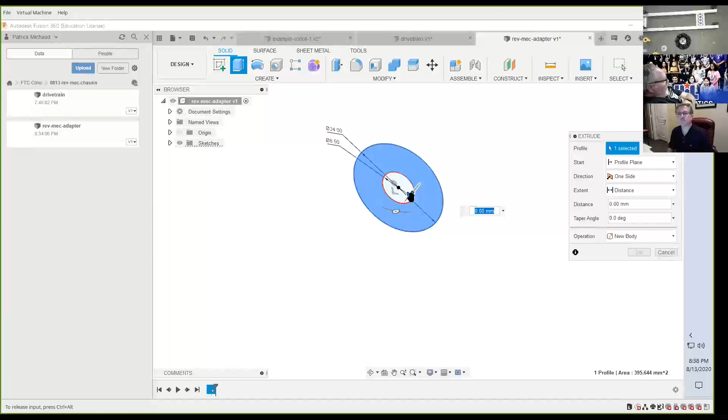And then extrusion is taking that circle and giving it length. So I can pull this away to give it some length. By doing that, I've made this tube, this cylinder, that is there for part of my adapter.

Now the question becomes, how much length should it have? For that, we need to do a little bit of calculation. We need to do some measurement of our mecanum wheel. So I'm going to go do a quick measurement on the mecanum wheel to find out how thick I need to make this part.

Let's go to my parts folder, and I'll go into the wheel section, and I'm going to grab the right mecanum wheel. I had already downloaded this from the Rev site.

There's the mecanum wheel. When you get the model from Rev, they have the center hub in here. I'm going to take that off, and I can just turn off the individual pieces by hitting the little eyeballs over here on the side. If I click on this piece, then you can see it's underlined. That's how I know which one it is. If I click the eyeball, then it hides it, so I don't have to look at it or deal with it. Same thing for this screw that's here. I can go through and say, oh, that's that one, and I can pretty well guess the other ones, and now I have just the wheel left.

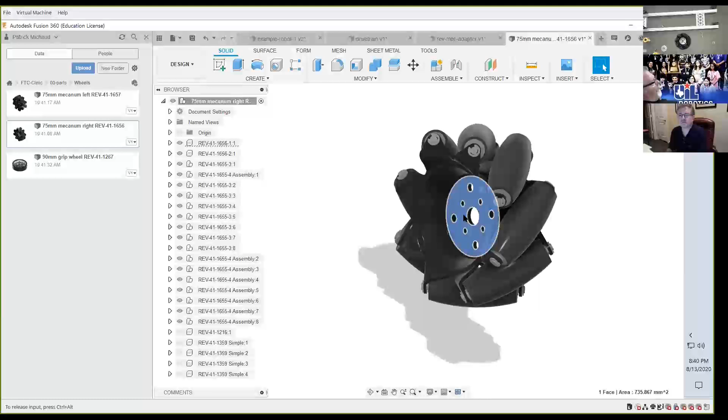So what I need to know is how much space I need between this flat part of the face and far enough away so the chain cannot hit the wheel whenever it's turning. That's the distance that I need. So I'm going to do a measure operation.

There's a menu up here called Inspect. You can do all sorts of inspections. I'm just going to do a quick section analysis to show you how cool this is. With section analysis, I can take a plane through my model and see the cross section of the model as it is in that plane, so I can see where all the pieces are. That's the kind of thing you can do in inspection.

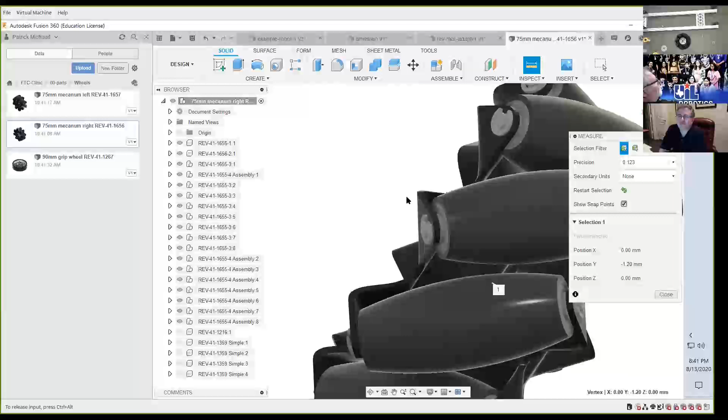The inspection I want to do at this point is just a measurement, and I'm going to show snap points so I can get a specific measurement. I want to measure from this face, so I'll click on that little center point, turn to the side, and measure to the tippy part of one of these little edges. I'll pull around and get a good look at that edge, highlight it, then grab the farthest point on that edge and click it. When I click it, Fusion 360 comes back and says the distance from the center of that circle, which is in the plane of this face, to that other point I clicked, is 34.762 millimeters.

But I don't want the as-the-crow-flies distance. I want the orthogonal distances. So if I click XYZ delta, it gives it to me in each of the different planes: 8.771 millimeters in the Z plane, and 27.602 millimeters in the X plane. The real number I wanted is this green line, which says 19.225 millimeters from this face to that point. So my spacer has to be at least that big.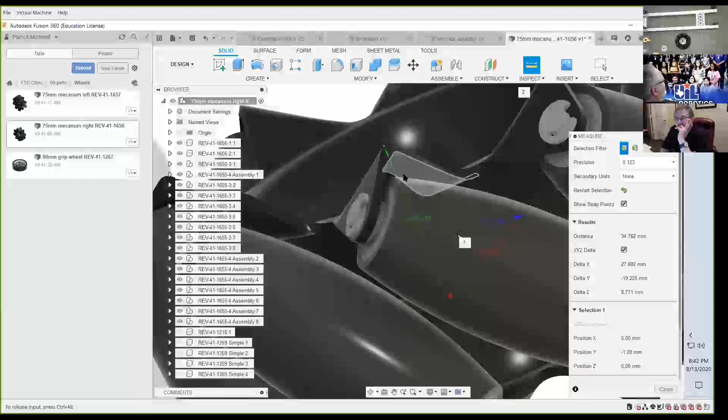But I need to be a little bigger still because I need room for the chain itself. In FTC, we use number 25 chain, which has a width of a little over a quarter of an inch, so I'm just going to assume 8 millimeters. Half of that is 4 millimeters. I'll add that to the 19, add a little bit more, and come up with 24 millimeters. That's how much space there needs to be between the face where I'm attaching one end of my spacer and the other end, which will have the sprocket.

So now I can go back to the adapter, go back to this extrusion, and edit it, and say make that 24 millimeters, and now I know that it's the right size for the spacer. I'm going to pause there.

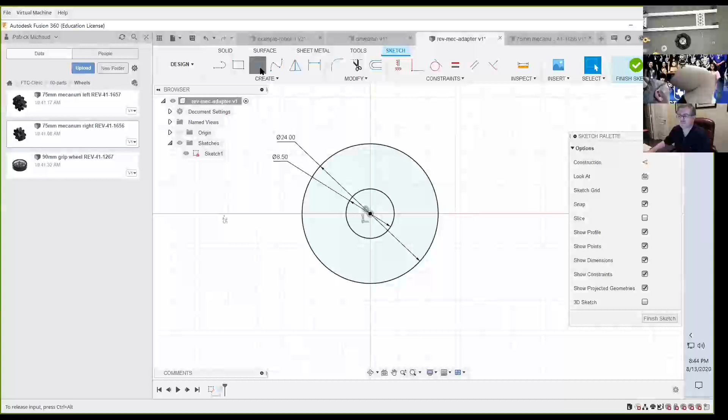I'm going to go edit that sketch and add some more pieces to it. So here we are back with that sketch, and I'm going to make sure I'm looking at it from the top. Now I need the holes for the screw holes, so I'm going to create those. That's another circle, going to be some distance away from the center.

The screws we're using are M3 screws, and I just happen to know from experience that you want a 3.4 millimeter hole for a through hole. The way I find that information is I can go look at one of the rev parts, do another inspect operation, and measure the diameter of that hole. Oh, it's 3 millimeters here.

Maybe I'll make it 3 millimeters even, or I'm going to go make it 3.2. The rev part has a 3 millimeter hole for the screw to go through, so that's probably a good size to use. Back in my adapter model, I'm going to change this to be a 3.2 millimeter hole.

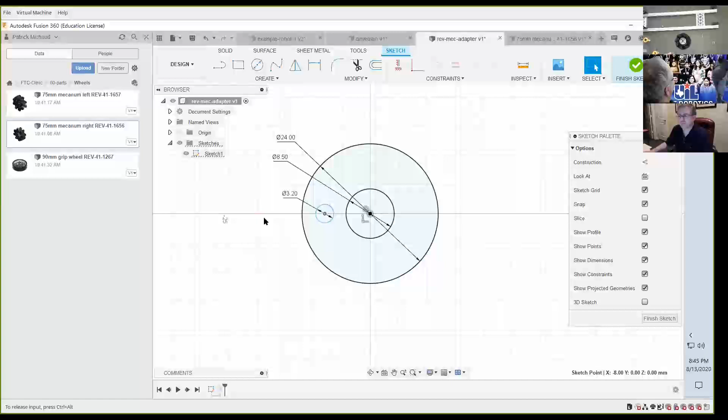I'm making it a little bit bigger just to give room for the screw to slide through. Now on the sprocket side, I need 6 of those holes to be able to mount the sprocket and take advantage of them. So I'm going to go ahead and put 6 holes in this. I could draw each hole individually, but it's really hard to get them spaced exactly right.

So there's an important tool I use all the time called circular pattern. Under the create menu I'll do circular pattern. Now I can take a set of objects or items in the sketch and arrange them in a circle around something else. It's asking me what objects I want to duplicate, and where's the center point I want it to go around, plus a couple other options, and it'll create it.

So I'm going to select this circle here, that's what I want to duplicate. And I'll say the center point I want to go around this. Once I click the center point, you'll see it's put 3 circles in here for me. I can even move them around—well, I don't know if I can move them yet, but I'll be able to in a second.

I want more than 3, I want 6. So I'm going to change the quantity to 6. Now you can see this is the one I was creating, and it's duplicated it in a rotational pattern around this center point so that I have 6 of them equally spaced. Then I can say okay, and there are my 6 holes.

Now, if I move the holes, they're in blue, and the reason they're in blue is because they're not fixed to anything yet. They're still movable, right? So we want to make sure we get the distance between them correct. My next step is to make sure they are at a specific distance.

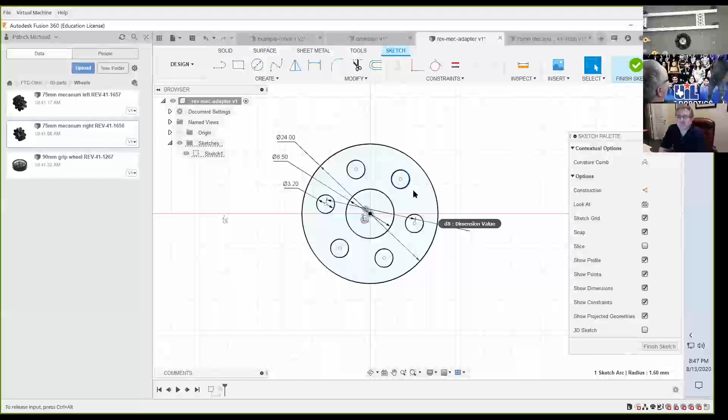Another thing that I would like to do is I would like to make sure that they're straight, aligned with each other. So there's a set of things called constraints. The very common one is horizontal vertical constraint, where you can constrain 2 items to be either in a horizontal relationship to each other or a vertical relationship to each other. So I'm going to select the horizontal vertical constraint, and I'm going to say I want this circle to be exactly horizontal with this circle.

And when I do that, now they're fixed and they turn black. And when you're doing a sketch, if something is black, it means it can't be moved. It's completely constrained is the official term. And so I know that those holes are going to be in exactly the right place. So now that I've added that, I can finish my sketch. When you've done an extrusion, it by default turns your sketch off because it assumes you draw a sketch, you extrude it, and you're done.

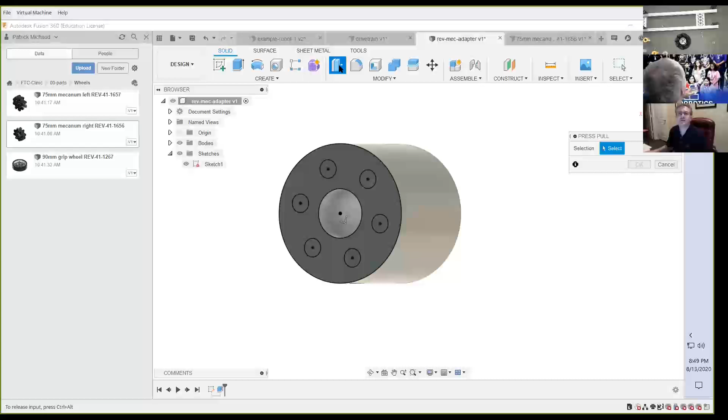I'm going to turn it back on and come around here. This is where my item is. And I'm going to make another extrusion part. Where's the press pull option? I can't believe I can't find it. Is it this one? No. Is it this one? There it is. Okay, it's under modify. So I'm going to do a press pull operation, and I want to do a press pull on that circle, that circle, that circle, that circle, that circle, and that circle.

If I pull away from the front face, it says, aha, you're wanting to create pegs. If I pull into the face, it says, aha, you're wanting to create holes. Right? And it kind of knows that by default. You can force it to be one or the other. Like you can force it to be a join, a cut, an intersect. I'm wanting it to do a cut. And so what it's doing is actually cutting holes into this piece.

And I'm going to make it go into the piece 8 millimeters because the screws I'm going to be using could be 8 millimeters long. But I only want to do it actually for 4 of the holes. I don't want to do it for that hole and that hole because I'm going to need 2 holes that go all the way through the piece. So I'm just going to do it for those 4 holes there.

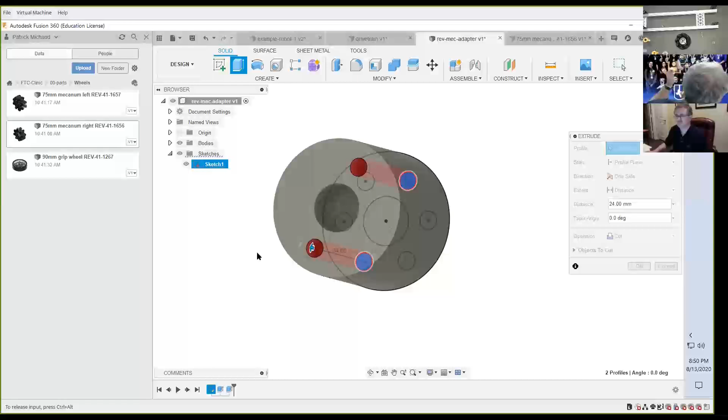All right, and now I can do another press pull, and I'm going to do these 2 circles that I didn't do yet, and I'm going to go all the way to the other side so that I have holes going all the way through the piece. So that's looking pretty good, right? And I can turn this sketch back off real quick. So here I have my 2 all the way through holes, and I have my 4 other holes that I'll be able to use to mount the screws.

Now these are through holes, right? And we want these to be able to grab screws. So we want them to be threaded. So really quickly, just because I think this is so cool that Fusion 360 will do this, I'm going to go to the Create menu, and I'm going to say, please thread these holes. There's a thread option here. So I can go pick those 4 holes that are not all the way through.

I can come over here to the thread thing, and it looked and saw the holes, and it says, oh, they're about 3 millimeters big, so you probably want an M3 screw. So I'm going to assume that it's an M3 screw. Now I can choose a different size of hole for metric, and if I knew I wasn't going to be using metric screws, then I can go to ANSI United States screws. But they are going to be metric screws.

So I'll go through and say, make those M3 screws, model those, don't just make them look like threads, but really put threads on them and say, okay. And now if I go look at my model, you'll see that my 3D printed part is actually going to have the threads to hold the screws in place. So that now when we go to attach the sprocket, we can screw directly into the 3D printed piece and we don't have to have a nut on the other side. To me, that's just really cool.

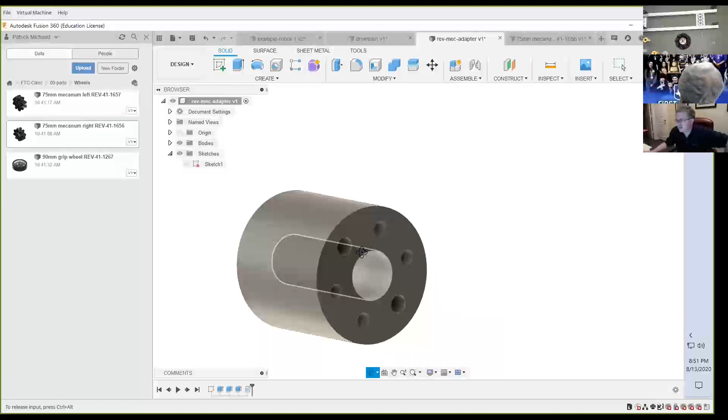All right, the last thing that we need on this is a place for the bearing to fit in. So I'm going to turn on this sketch again and edit it. I need one more circle for the bearing to go in. So I'm going to say, give me a circle, centered on this one, and this one needs to be 12.3 millimeters. Like so.

The reason for 12.3 millimeters: the outer dimension of the bearing is 12 millimeters, and I can measure it with a caliper and it'll come pretty close. But when we print with a 3D printer, it's not going to be precise, so if I model it as exactly 12, the hole we get is going to be too tight to press the bearing in very well. So usually you want to add about 1/10, 2/10 or 3/10 of a millimeter for the parts to fit together as a press fit.

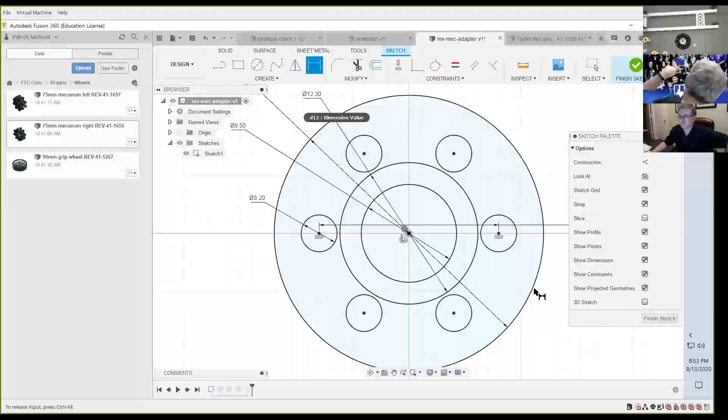Typically 1/10 is considered a very tight fit, 2/10 is a snug fit, and 3/10 is kind of a loose fit, but still snug enough. So I'm just going to do 12.3 for that hole. I'll finish the sketch. Once again, we'll do a press pull operation. I'll grab that circle, and I know the depth of the bearing is 3.5 millimeters, and now I have an inset where the bearing can go. If I turn off the sketch, we're in pretty good shape.

So there's the 3D printed part on that one side. I just need to create the holes on the other side. Actually, I don't even need them if I'm not going to screw them in. So I could just create the hole on this other side. Let's go ahead and do this other side really quickly.

Anybody have any questions so far? Anybody need me to pause or anything?

Okay. This time we're going to want to cut into the other side, so we have to make a new sketch. Once again, it's asking me what plane I want the sketch on. I want this new sketch right on this end of the extrusion of this spacer. You can literally just select this plane and that becomes my sketch plane. And it already knows the shape that's there: it's put a circle for the inner bore and the outer circle. So it's already created a default sketch that is the shape of this flat surface.

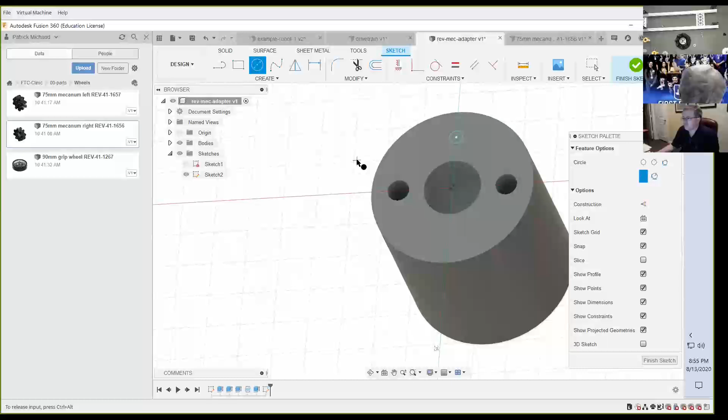So I need another pair of holes that will be used to hold the screws. So I'm going to say, put a hole here for me, please. Let's do a constraint. There's an equal constraint when you want to make sure two things are the same size. I want this circle to be the same size as that circle, so I select them and say make them equal. You'll see it's put little equal bars on these two to indicate that they are equal in size.

And I'm going to do the same thing I did before with the circular pattern. Take this circle and repeat it around the center point, 2 times so they'll be 180 degrees from each other. Okay, and so it did that. Actually, I'm going to make sure they're vertically connected, like so. This little marker says the center of this circle is vertically constrained with this one. And now I can set the distance between these two to 16 millimeters. I got it right before, and now they're that way.

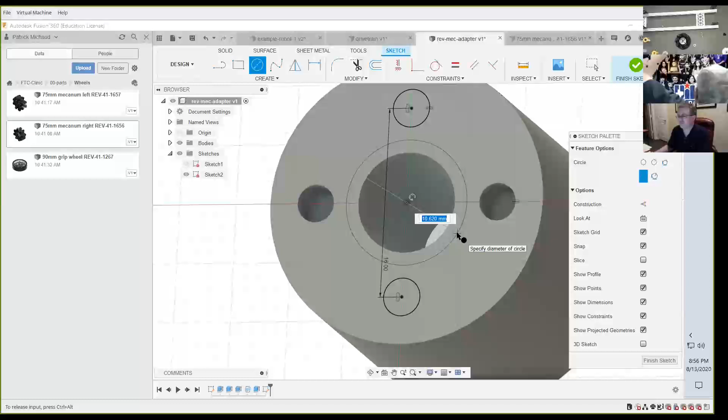I need a 12.3 millimeter circle for the bearing that goes on the other side. So 12.3, like so. And you can see just how close things are with this bearing. Even without a flange, we're getting really close to those screw holes. Now we're going to do a couple of press pulls. Oh, it doesn't show up on this one. Okay, so I'm going to finish my sketch, and now I'll press pull these two circles. I'm going to go in by 8 millimeters, so I can type in -8.

And that says go in a depth of 8 millimeters. And I'm going to turn that sketch back on. And I'll press pull this one and say go in by -3.5 millimeters. And that is there. And now let's add the threads in those two holes.

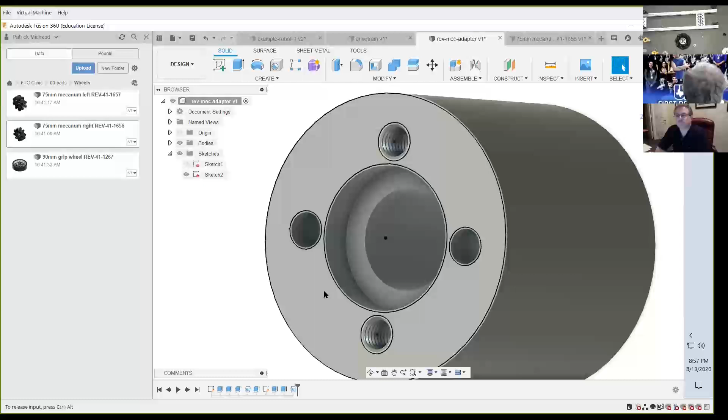Actually, I don't have to add it. I'll add a new set of threads. It's what most people would almost certainly do. But I'll just select this hole and say model it and do it that way. And now those are threaded holes instead of just being through holes. And we're pretty close to done.

I'm going to go ahead and save this at this point. I'm also going to change the appearance just because I can. For this one, to make it look really cool, it's going to be metal, and of course it's going to be gold. So now I have a gold spacer. Let me save that as well.

Let's turn off the sketch. And so there I pretty much have the spacer created. Now there's a few things we haven't handled yet, and I'll cover those when I do it again this way, but that gives you the general idea of how to use the spacer.

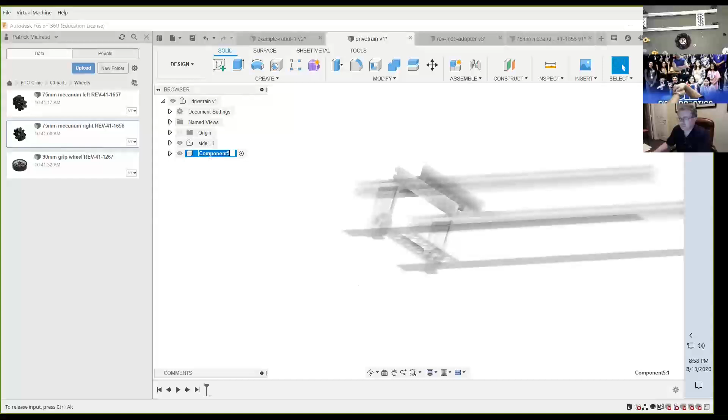And so now when we go back to our drivetrain and we start pulling in a mecanum wheel, well, let's make a new component for it. Actually, we'll just stop in this component, which I'll explain a little bit later. But I'm going to create a new component. And this is going to be the wheel assembly. I'm going to pull in a left mecanum wheel into that.

And I'm going to pull in my spacer, my REV mec adapter. And now we could start doing the standard things that we would typically do, joining those together, adding the sprocket, making it all into one piece. But I'm going to stop there and come back to this for next time.